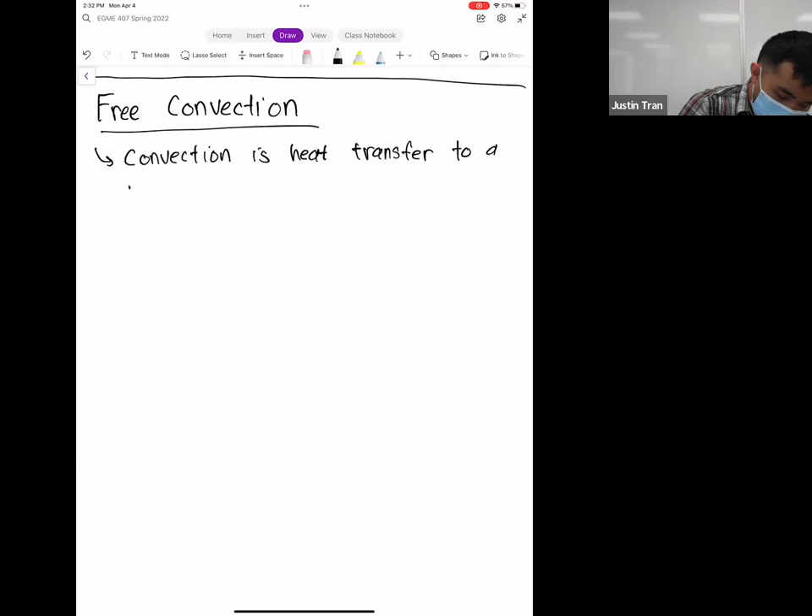The key word there being moving, right? The unique thing that fluids can do that solids can't is that they can flow. By flowing, they basically take any heated particles next to the surface and move them along with the flow. So we've seen that convection is always going to enhance your heat transfer relative to conduction.

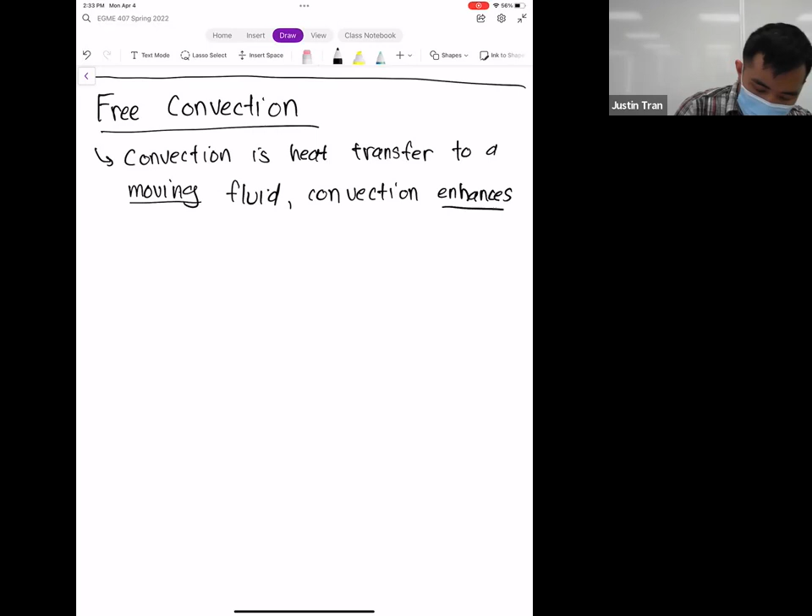Before the break, I gave you an interesting thought experiment. We've always thought of convection as occurring with a moving fluid, but I asked you: is it possible to have convection when the fluid does not have any forced velocity? Of course, the answer is yes. The way we can get moving fluid without forcing it, let's say without a pressure gradient or a fan or something like that, is through buoyancy.

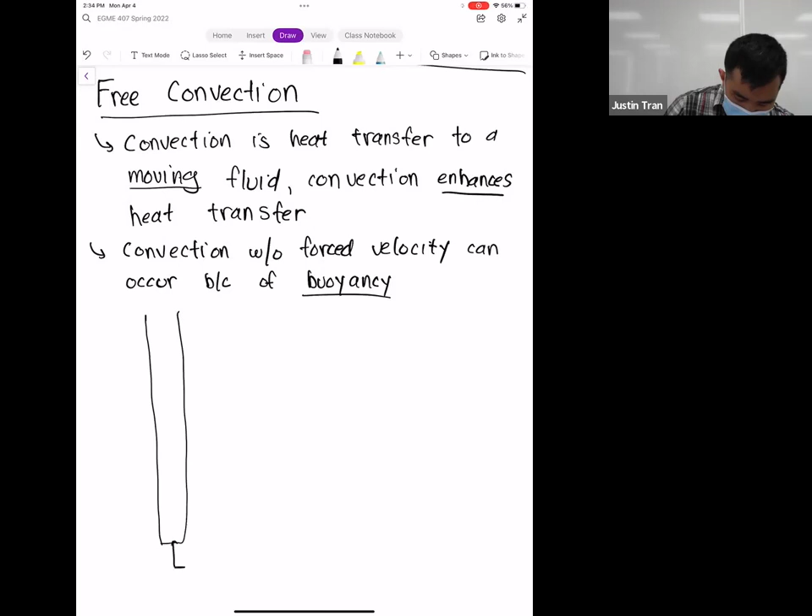Everyone thinks of buoyancy as the tendency for things to float in water. The situation we're looking at is one that looks like this: we have a plate at some temperature Ts, where Ts stands for the surface temperature. This plate is surrounded by a fluid at a temperature T infinity.

But we also know that this fluid is still, and a still fluid means the velocity in it is zero. But if the plate's temperature was higher than the fluid's temperature — let's say Ts is greater than T infinity — this means that the fluid next to the plate is going to be heated up.

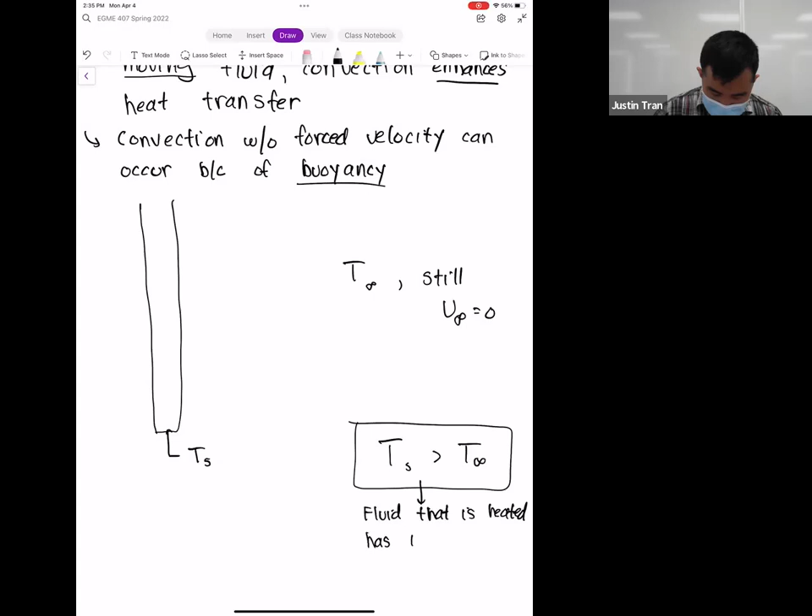And we know that whenever fluid is heated, its density goes down. So what you have here, if I draw a boundary layer like this, is that next to the plate you basically have fluid of a lower density, and outside there is fluid of a higher density.

Assuming we're on planet Earth or some celestial body with gravity, and gravity points downwards like that — whenever you have a fluid with a lower density sitting in a fluid with a higher density, that fluid is going to want to rise. It's going to go against the direction of gravity.

And thus, even without forcing it ourselves, just by having different degrees of density within our fluid, we're going to get some flow. Oftentimes it may not be a lot of flow, but that flow is enough to trigger convection. So you get situations like this where you have more heat transfer than you would if the fluid was just completely still.

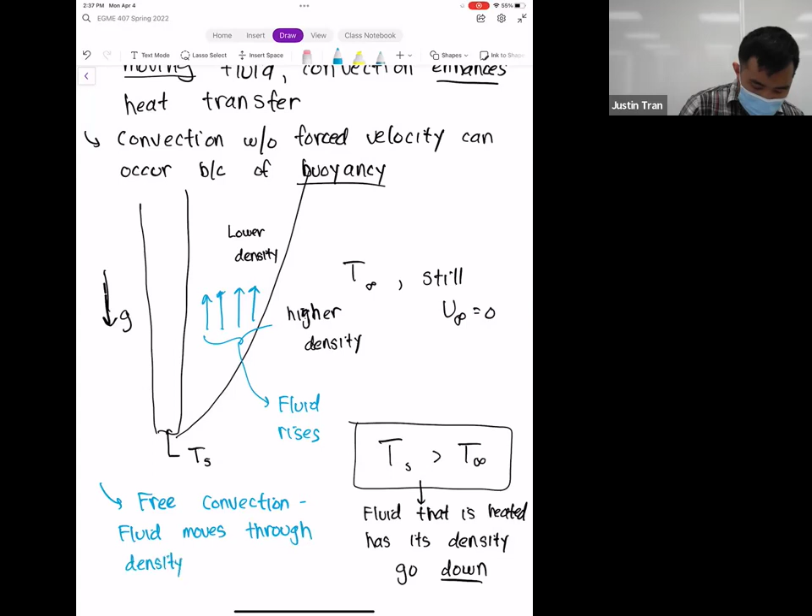Right, and we were in the middle of examining these kinds of situations.

All right, so what you'll see is that the process we're going to go through is still the same. We're still going to be identifying our geometry, computing Nusselt numbers, using those Nusselt numbers to compute H, and then from H we can use them in thermal circuits or what have you. It's just that because the nature of the flow here is fundamentally different than all the other convection situations we've seen, it's going to change how we interpret certain things, and it's going to change what non-dimensional numbers we're going to use as well.

Any questions on this?

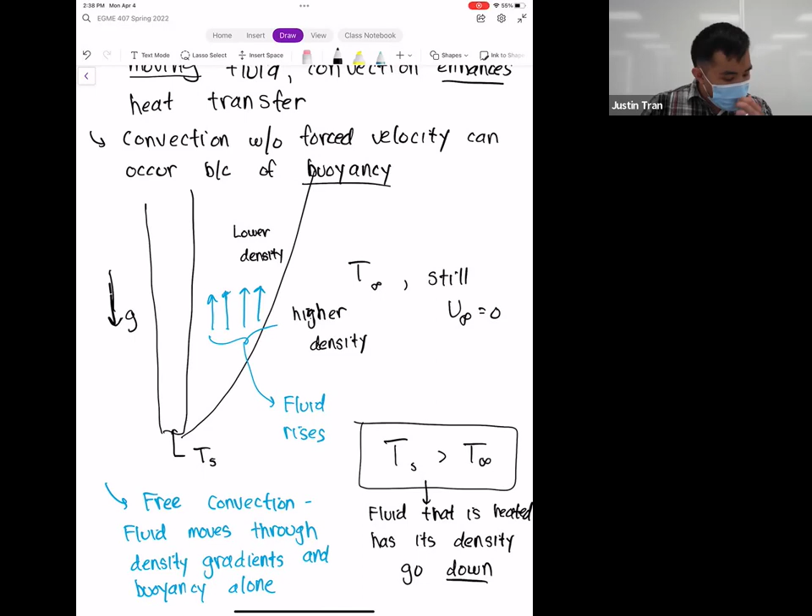Okay, so let's talk non-dimensional numbers, and in particular, let's talk about two new numbers that we haven't seen before, which is the Grashof number and the Rayleigh number.

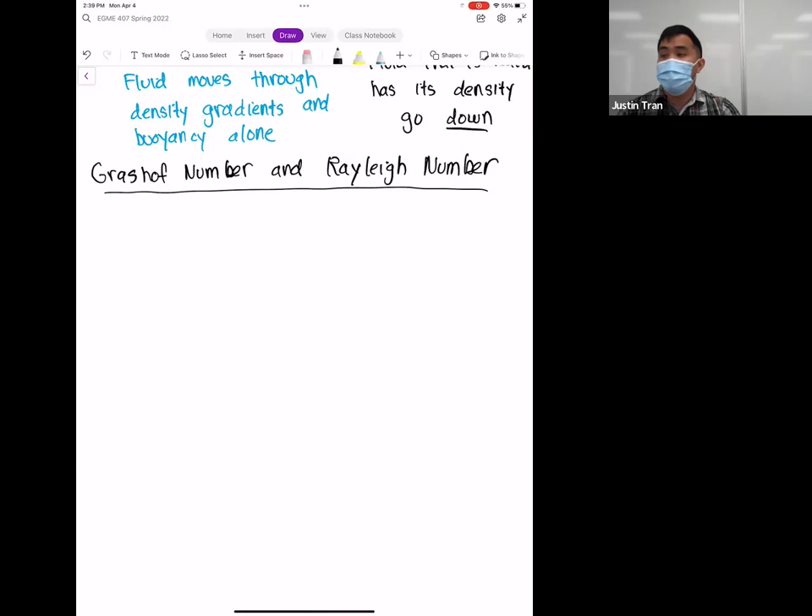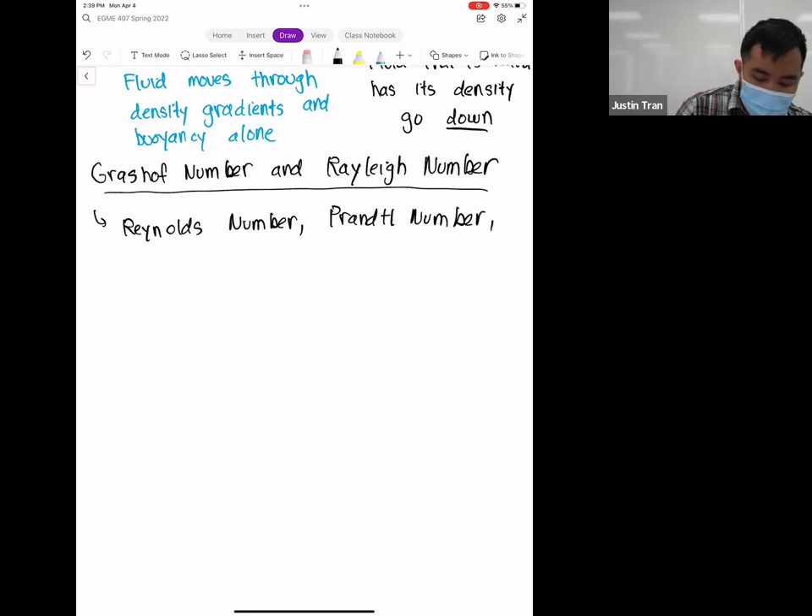All right, so what we've seen so far in convection is that these non-dimensional numbers are playing a huge role in how we compute our coefficients, right? So far we've seen things like the Reynolds number, we've seen the Prandtl number, and of course the Nusselt number. All of these non-dimensional numbers have been vital in our analysis of convection.

Right, because what we've been doing is taking physical situations, computing these non-dimensional numbers - the Reynolds number, the Prandtl number, and Nusselt number - and basically using experimental results or experimental correlations that people have discovered in the past to compute things like convection coefficients. But free convection is a little bit different, and in particular, I want to focus on the Reynolds number here.

The Reynolds number, we know, is defined as the ratio of inertial forces to viscous forces. And of course, its formula that we've been using is some velocity multiplied by some length, divided by viscosity.

In particular, I want to talk about the numerator, inertial forces. According to this relationship, inertial forces equal the product of a velocity multiplied by the length. In particular, this velocity here is the velocity of the forced flow - the velocity that we're forcing the flow to move at. This is the velocity we use, say, if we have a fan that's driving our flow, or if we're external, out in the atmosphere, that's the velocity of the wind currents. In other words, this is a characteristic of how much we're forcing the fluid to flow.

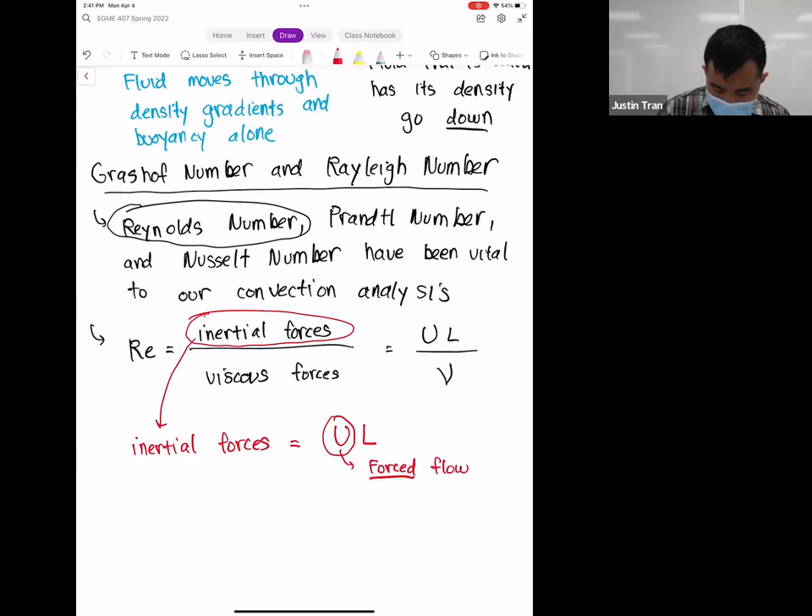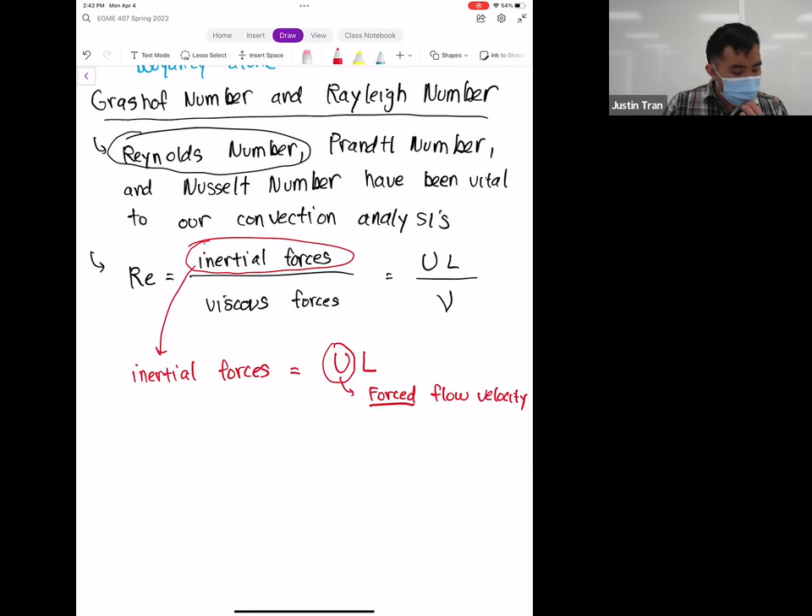For free convection, of course, we don't have forced velocity anymore. We don't have forced flow. And so it doesn't make sense to use the Reynolds number at all, because we're not forcing any flow. Instead of the Reynolds number for free convection, we need a different number.

In particular, for free convection, just what we mentioned above, the most relevant mechanic now is not forced flow or inertial forces, but instead we have buoyant forces. And so it'd be great if we had a non-dimensional number where instead of inertial forces, we have buoyant forces, and on the bottom we still have viscous forces.

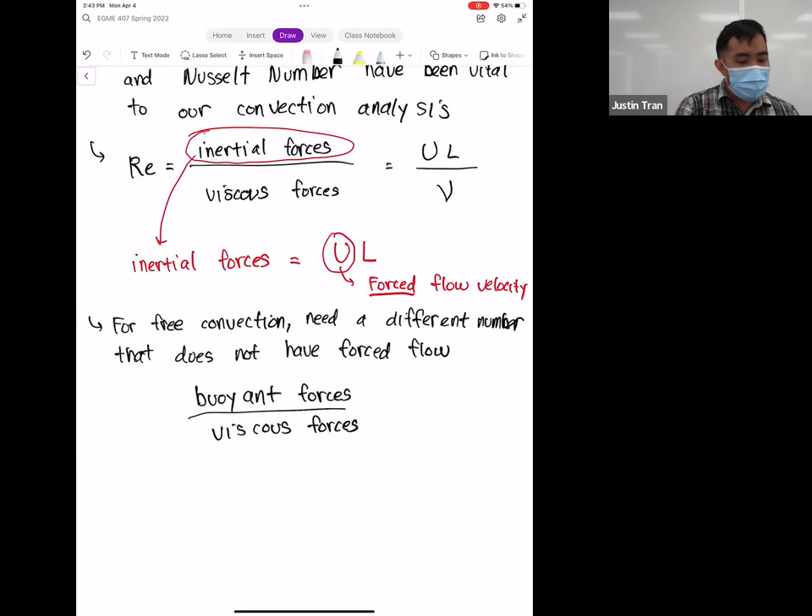And so this is the ratio that we should be looking at instead of the Reynolds number. Luckily, this number does have a name - someone has already discovered this, a dude named Grashof. Of course it's named after him, so the Gr here stands for Grashof number, and its expression is given by the following.

And so for buoyant forces, we can kind of reason this through a little bit. Whenever you talk about buoyant forces, gravity is always going to play a role, because the main driving force in buoyancy is essentially differences in weight. And when you're talking about weight, you're always talking about gravity to some extent, right? So gravity has to be there.

The other thing that drives buoyant forces is the temperature difference. The reason why we're having density gradients, or differences in density in our fluid, is the fact that we have a difference in temperature between our surface and our fluid. So that has to be there.

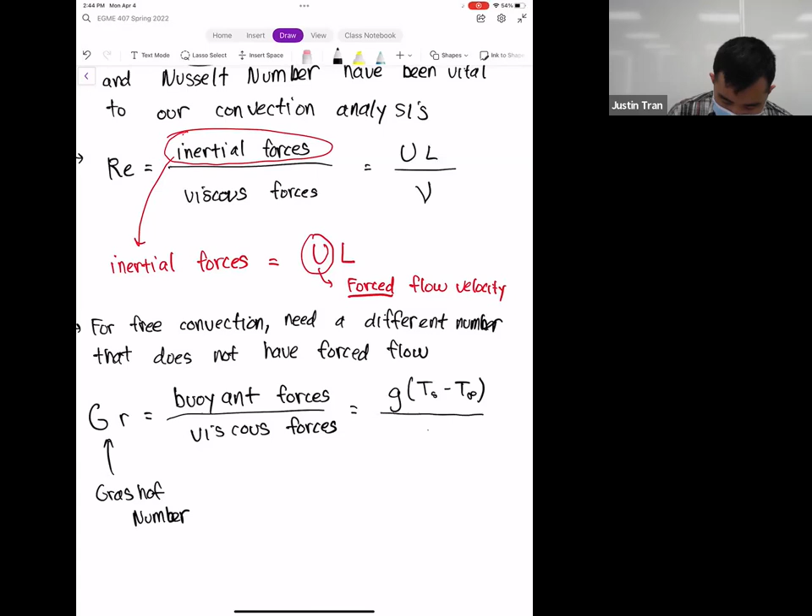And then in the denominator, we have to have the kinematic viscosity, right? There's nothing that represents viscous forces better than viscosity itself, so we have to have viscosity there as well.

And so this is kind of like our blueprint. This is the blueprint for our Grashof number, where in the numerator we have a lot of quantities that represent buoyancy, and then in the denominator, we have our representation of viscosity. So in essence, this is kind of the start of our Grashof number - it's not complete yet, we still have to non-dimensionalize this. But I want to walk you guys through the logic of how these non-dimensional numbers come to be.

All right, any questions on this?

Okay. All right. So here's the beginnings of our Grashof number. We have our gravity and temperature difference up top, and we have a viscosity on the bottom. But we can't use this yet, because the thing about non-dimensional numbers is they have to be non-dimensional, and this right here still has dimensions.

If you write out the dimensions for all these things, gravity is meters per second squared. Temperature, of course, here is in Kelvin or degrees C. And kinematic viscosity here is meters squared per second. And so nothing is canceling out, so we have to add some more terms to this or do some more work to make it non-dimensional.

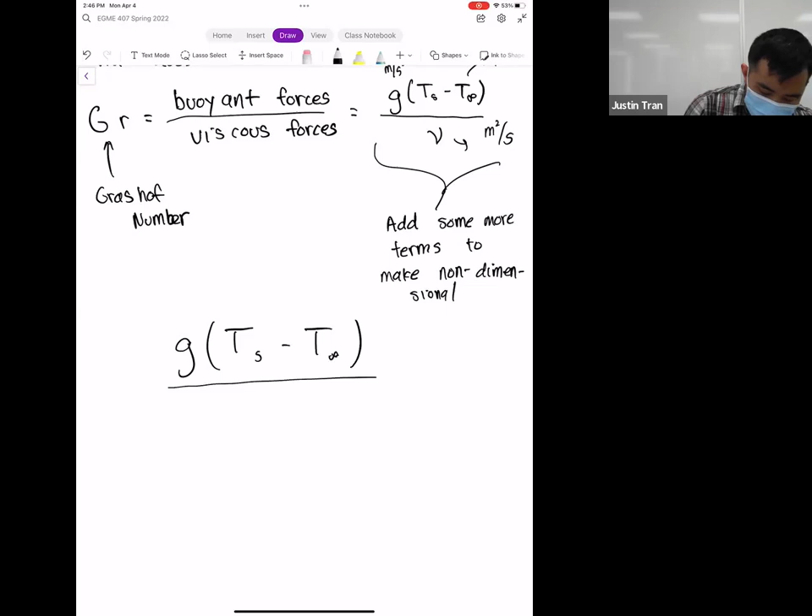Okay, so let me go ahead and write it down here a little bit bigger. We have gravity times the temperature difference divided by viscosity. The first thing we're going to need is something to cancel out the temperature, because there's no way that viscosity is going to have anything to do with temperature. Viscosity is not a temperature dependent process.

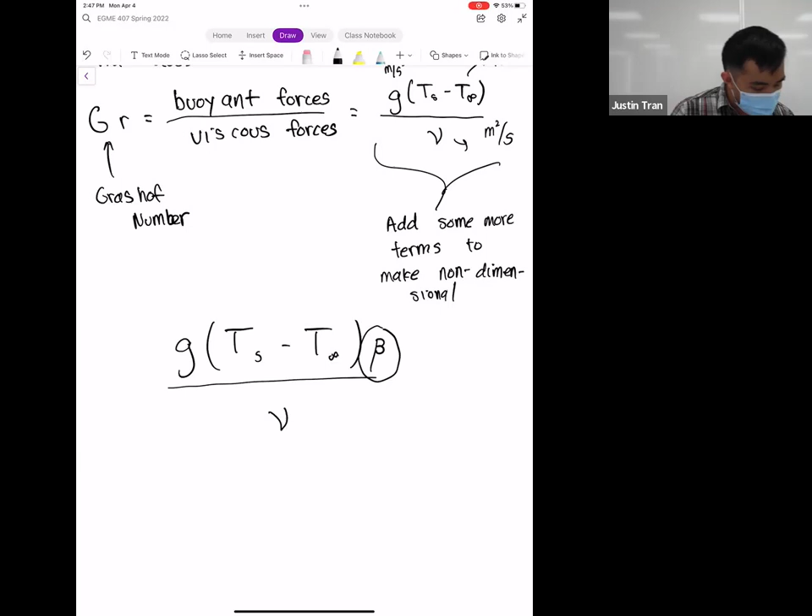So what I'm going to do is add this parameter here. We'll call it beta. This beta is known as the thermal expansion coefficient. The units for beta here are going to be 1 divided by Kelvin, or 1 over temperature. And so that's going to cancel out the temperature units up top.

We're not going to spend too much time talking about what beta is, because that gets more into fluid mechanics and continuum mechanics. But the way you can interpret it is that it's a way to express how quickly the density of a fluid changes with temperature. Different fluids will react differently. Some fluids will have their density change very rapidly with temperature, and some will change very slowly. This beta is a parameter that reflects that. It's not that hard to compute, and we'll do an example a bit later. That takes care of the temperature units.

The next thing we have to do is cancel out the gravity and the viscosity. Up top, what we have is meters per second squared, and on the bottom we have meters squared per second. So we have to multiply this by a few things to cancel these two out. Up top we have 1 over second squared, so to cancel that, the viscosity down here has to be raised to the second power. If we raise this to the second power, we get meters to the 4th divided by second squared, and so the seconds will cancel out.

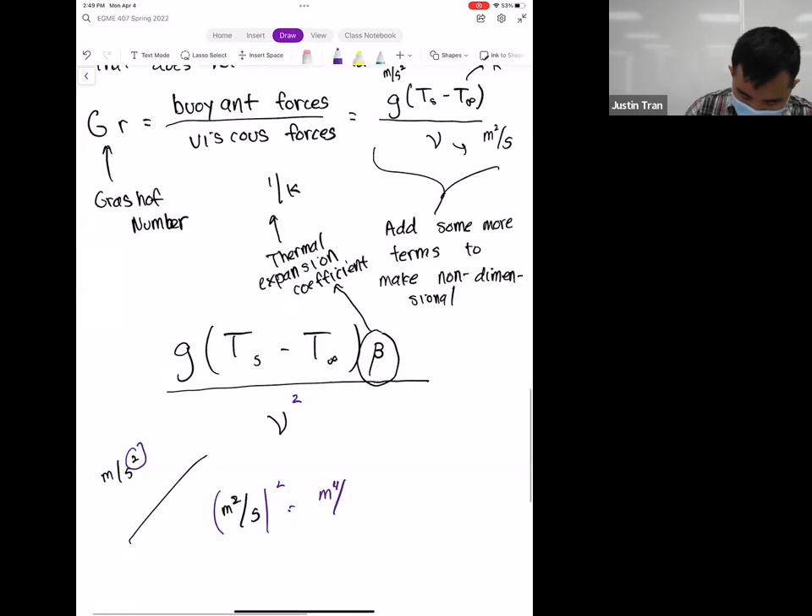But now we have too many meters. We have a meter up top and a meter to the 4th on the bottom. To cancel that, we're going to take a length scale. That length scale could be any kind of length scale in your problem, and we're going to multiply that up top. So we have m cubed up here, and this m cubed is going to cancel out with the m to the 4th. We end up with m1, and that m1 is going to cancel out with that. And so that's our full expression for the Grashof number.

So our Grashof number here is going to be g times beta times (T_s minus T_infinity) multiplied by L cubed, divided by viscosity squared. This is our expression for the Grashof number. It's a bit more complicated than the Reynolds number, just because the units for this were a little bit difficult to work with, since we have to work with temperature. But that's the logic of how this Grashof number came to be.

And remember, what the Grashof number represents is the ratio of buoyant forces to viscous forces. What this Grashof number is going to do is play the same role as the Reynolds number in our previous Nusselt number correlations.

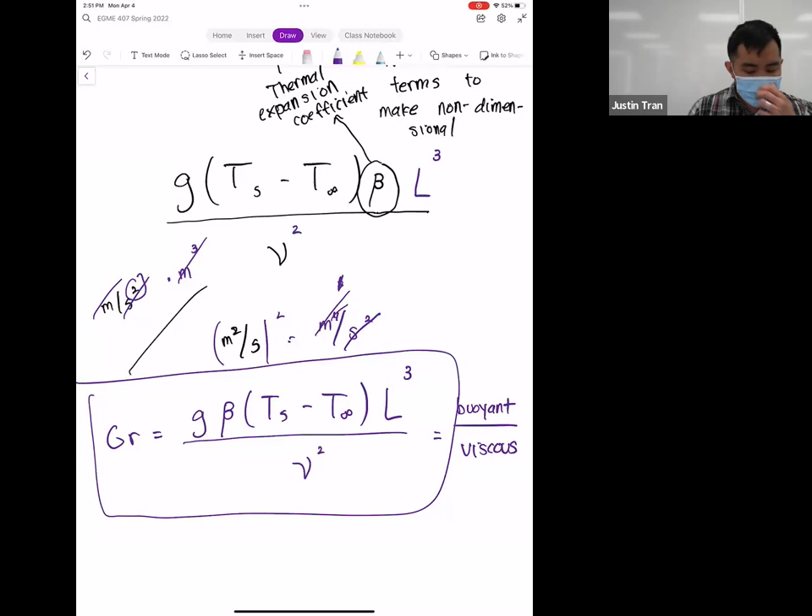So basically, we're going to follow the same process that we've always done for convection coefficients, but instead of the Reynolds number, we're computing this one instead. All right, any questions on any of this?

Okay, so now we have a new non-dimensional number that joined our family, right? So we have the Grashof number, and we'll talk about the Rayleigh number in a little bit. But before I talk about the Rayleigh number, let's go ahead and do a little bit of a comparison

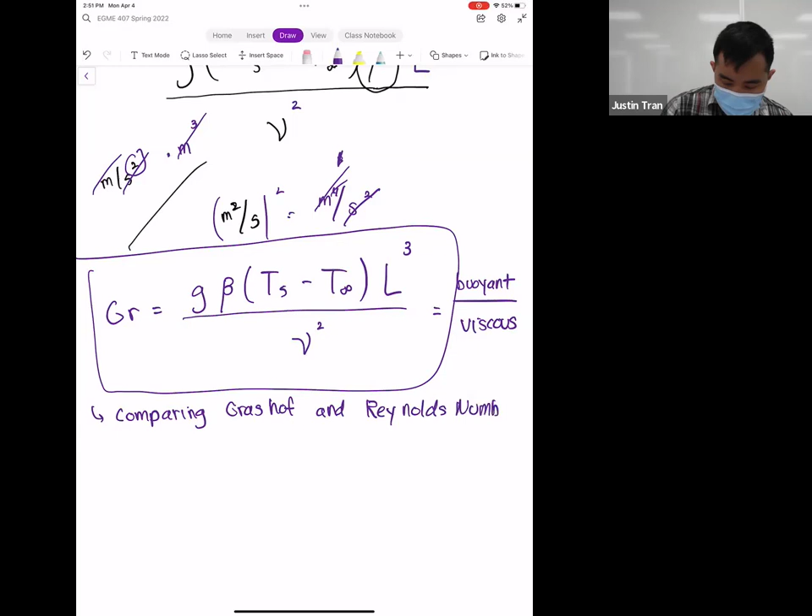of the Grashof number and the Reynolds number. And in particular, I want to use these numbers in a situation when we have both free convection and forced convection.

Or in other words, I want to answer the question of, how come we've ignored free convection up to this point? Because this is a heat transfer class, and no matter what, we're always going to be working with temperature differences between the surface and the fluid. So in theory, free convection should always be there because we're always working with temperature differences. But up to this point, we've kind of just pretended it doesn't exist, right?

So why have we done that? If you remember, before we went on break, I think I made a comment about how most of the time, when you have both free and forced convection, most of the time the forced convection is going to dominate.

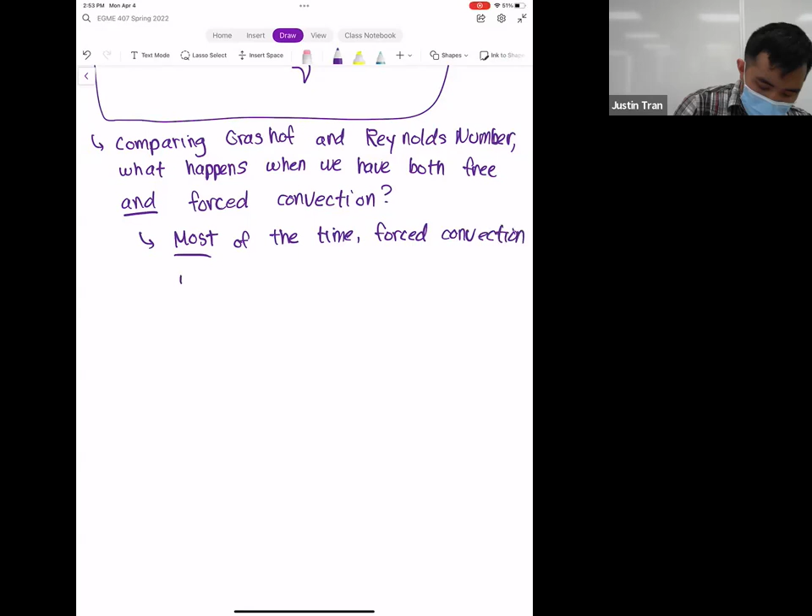And the reason for that is that the magnitude of the velocities that you get from these buoyancy differences is usually pretty small compared to, if you stick a big fan next to your surface, right? But there are some situations when free convection is actually going to be greater than forced convection.

Because most is not all of the time, right? And so how do we determine which one is going to dominate, or if we need to consider both at the same time?

So we can assess, and in other words, we can measure, the relative strength of the free and forced convection by using their two corresponding non-dimensional numbers.

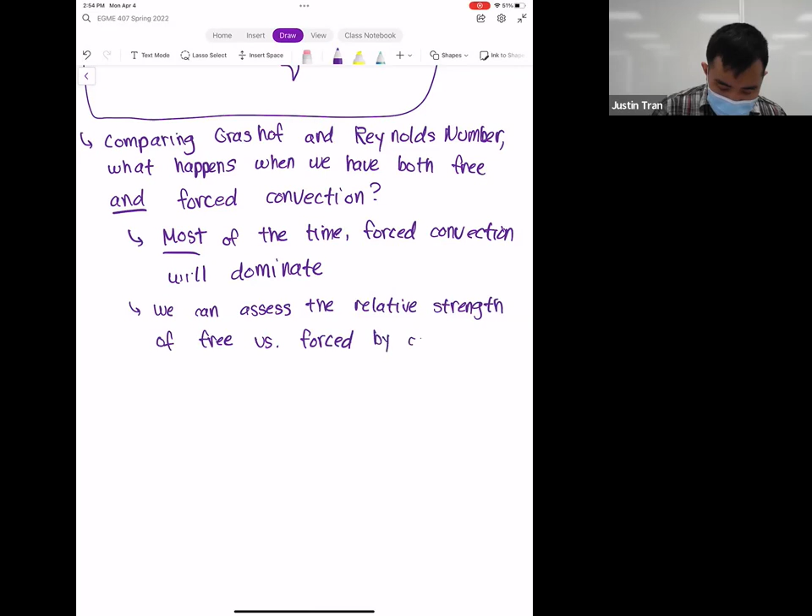And their non-dimensional numbers, remember, are the Reynolds number for forced flow and the Grashof number for free flow. And so if we take the ratio of the Grashof number over the Reynolds number,

and just to make sure that the two viscosities have the same power, we take Reynolds number squared, because remember the Grashof number has viscosity squared on the bottom. And so depending on the value of this ratio, we can determine which one is going to dominate or if they're the same.

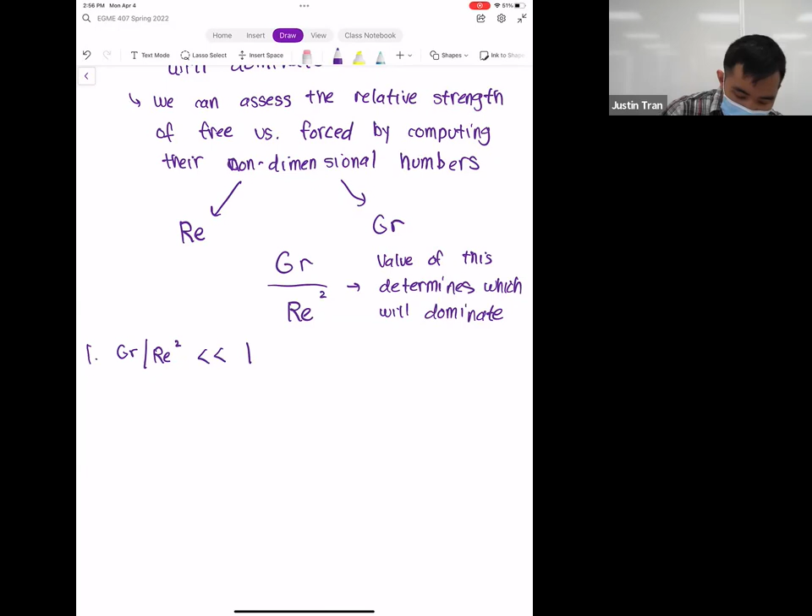So I have three situations here. If the Grashof number divided by the Reynolds number squared is much less than 1, that means the Reynolds number is really, really high compared to the Grashof number. And in these situations, the forced convection is going to dominate.

And if the forced convection dominates, that means we can ignore the free convection. You can basically treat it the same as a problem that we've been doing for the last few weeks.

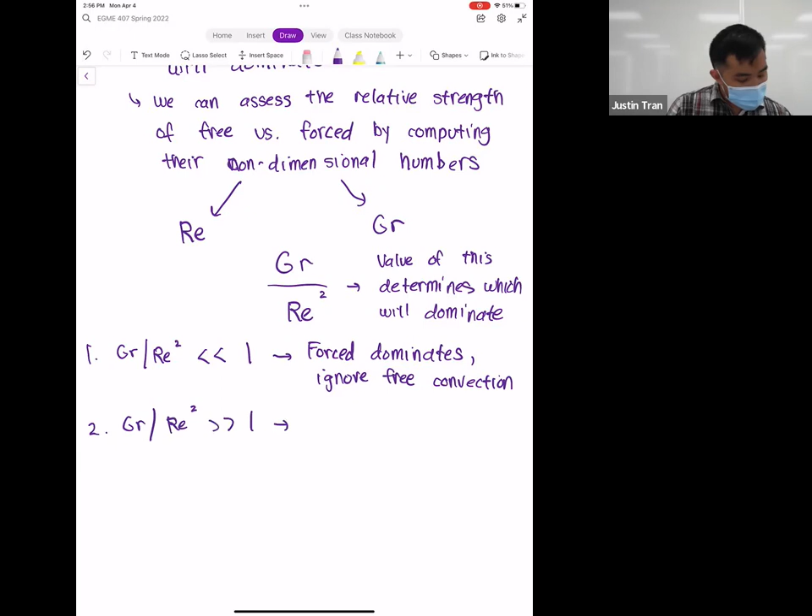And then you have the opposite situation. So let's say that the Grashof number over the Reynolds number squared is greater than 1, much greater than 1. In this case, the free convection will dominate. Here we can ignore the forced convection.

So those are the two extreme situations. And of course, we have the situation where the Grashof number and the Reynolds number are roughly equal magnitude. And so if the ratio here is 1, that means you have true mixed convection.

And so here you have to take both into account. You can't ignore one or the other, but these situations are very, very complicated. It's a lot more complicated than just solving the free side and the forced side separately and just adding them together, because the two phenomena are actually going to affect each other.

And so the density differences are going to affect the flow, and the flow is going to affect the density differences. So you can't really solve them separately and then bring them together. You have to solve them both at the same time. Most of the time, you're going to need some kind of computer software, some kind of simulations to do this, because it's a little bit too complicated to do by hand. So we won't cover any of these situations in this class, but just know that these are very, very complicated.

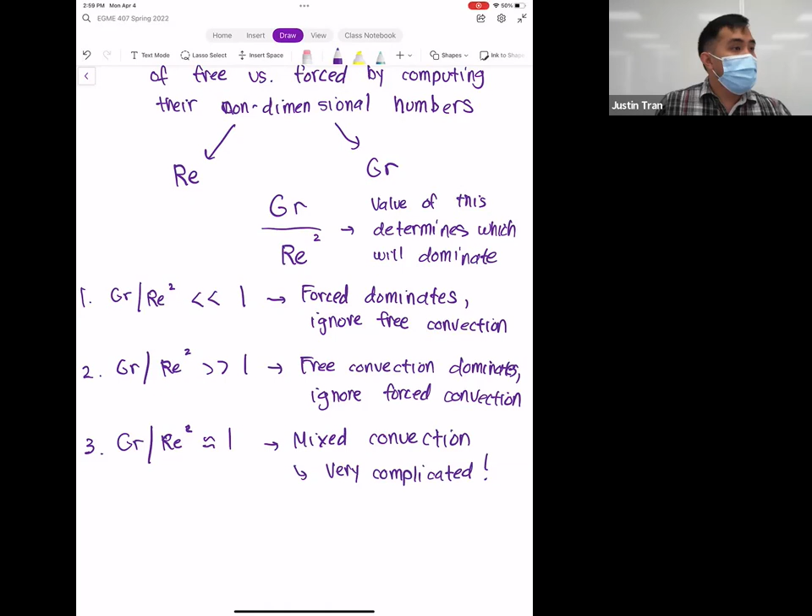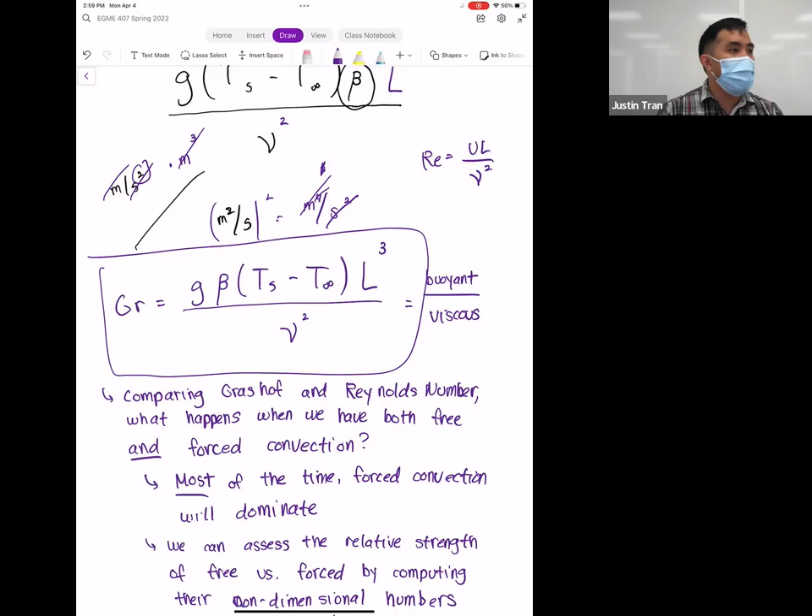So the Reynolds number is squared because if you look at our definition for the Grashof number, we have viscosity squared, and we had to square the viscosity to cancel out these units. But the Reynolds number is just U times L over the viscosity. So even though both are non-dimensional already, we want to make sure we're comparing apples to apples. We want to make sure that one has viscosity squared, and the other one has viscosity squared too.

Okay, so let's talk about the Rayleigh number. It's actually a little bit of a convenience for us computing these calculations. If you remember from homework 4, whenever you compute the Nusselt number, it's always a product of the Reynolds number and the Prandtl number. In other words, the Reynolds number and the Prandtl number, they always appear kind of in pairs.

So in other words, we had our Nusselt number, and all of our correlations took this kind of form. We have A, where A is some decimal, and the Reynolds number raised to some m power, and the Prandtl number raised to some n power. So all our correlations basically take the same form: Reynolds number to some power multiplied by Prandtl number to another power. We couldn't really combine them because their powers were different, so m and n are different.

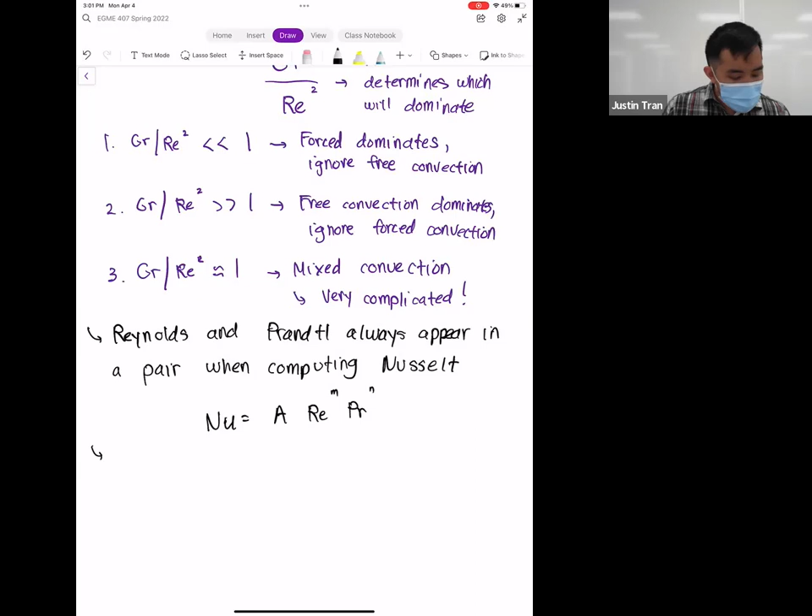What's unique is that, just based on how the Grashof number is defined, whenever we compute Nusselt numbers for free convection, both the Grashof number and the Prandtl number appear with the same power.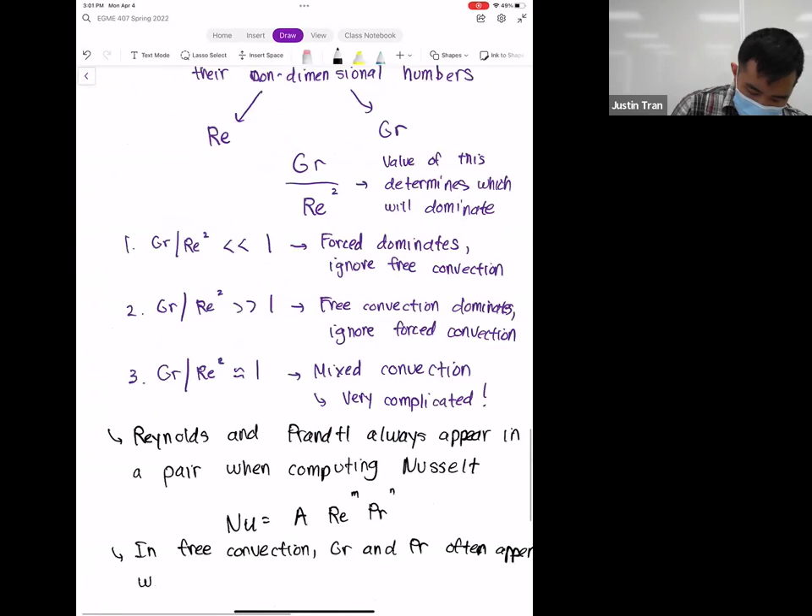My stylus is still on spring break. So is my spelling.

There we go. Okay, so for free convection, we usually have something like this: the Nusselt number is equal to some coefficient multiplied by the Grashof number times the Prandtl number, but these are raised to the same power. They usually appear like that, just based on how the Grashof number is defined.

And because these two always appear together, okay—this is probably the easiest PhD dissertation in the world—there's a guy named Rayleigh. What he knows is that these two always appear together, so let's just combine them. The Rayleigh number, which we'll call Ra, is equal to the Grashof number multiplied by the Prandtl number.

Yeah, so they both have the same n. So what you're going to see is that all of our Nusselt correlations will take this form: Nu equals A multiplied by the Rayleigh number raised to some n power. So all of our correlations are going to look like this.

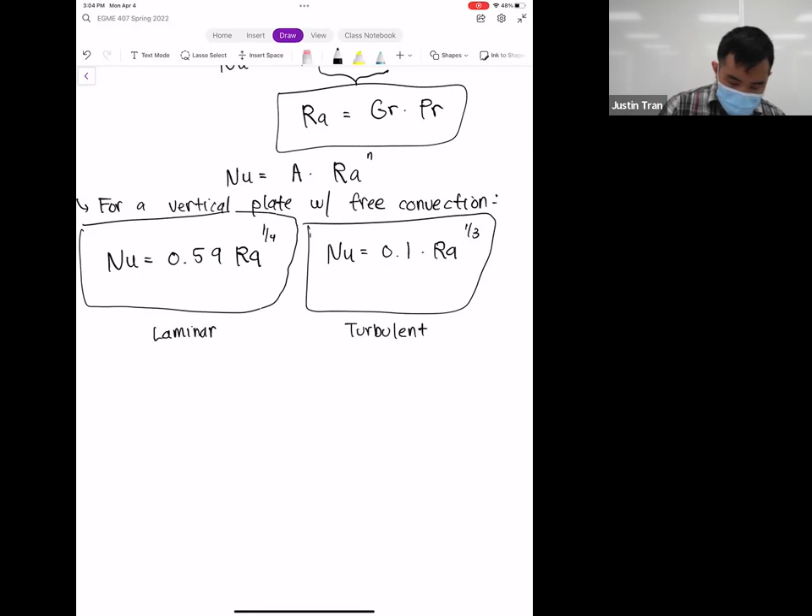And you're probably asking, how do we know if the flow is laminar or turbulent? Well, just like in forced convection, we use our non-dimensional number for it, which here is the Rayleigh number. For free convection, that threshold is 10 to the 9th. We'll call this the critical Rayleigh number, Ra_c. So when the Rayleigh number exceeds 10 to the 9th, that means we're going to have turbulent flow.

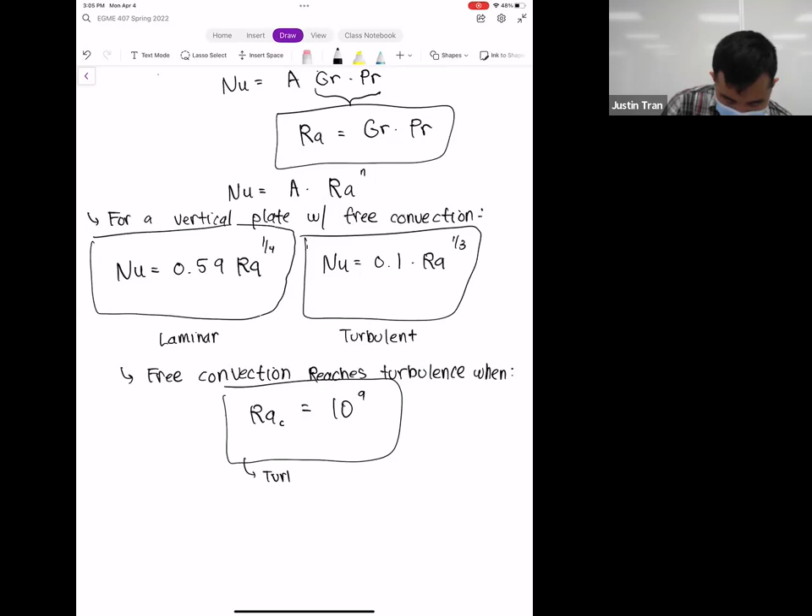Okay, so now that we know what free convection is, and we know how to compute its Nusselt number, we're ready to start doing some examples. That's all we really need to do a convection problem: we need to know what the geometry looks like, what the physics are, and how we compute the Nusselt number. Now that we have all that, we're ready to start doing some problems.

Professor, if I can ask—yep, what's up? So whenever we're dealing with some of our free convection problems, we only consider it outside of a pipe, right?

We don't consider it different if it's flowing through a pipe, only when it's hitting a plate or any other exterior surface. We're only looking at the flow itself. I do have an example with external flow added, but for now we're just going to consider free convection, where the fluid is normally stagnant, and density differences incite some flow.

Okay, thank you. Any other questions before we jump into an example? All right, so let's go and do a simple example.

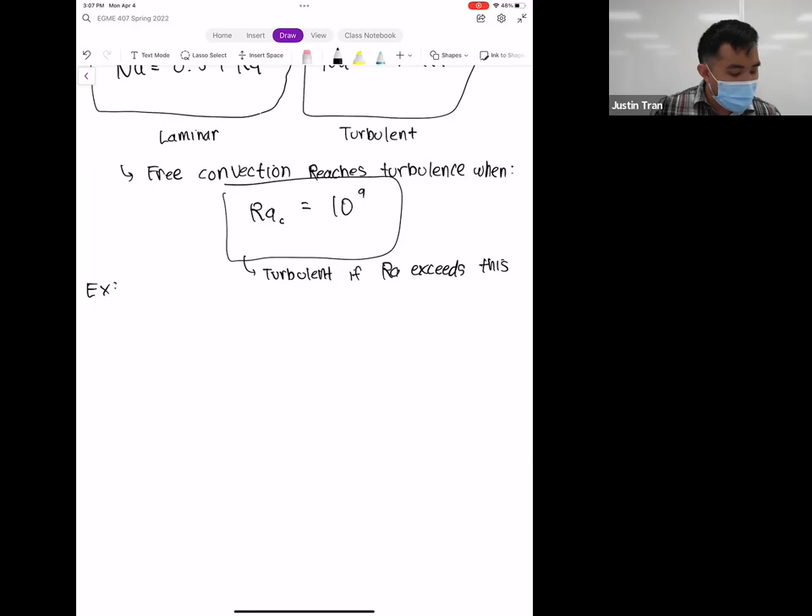Let's consider a vertical plate, and let's say the plate is hotter than the surrounding fluid. Here's our vertical plate, and the surface temperature here is 70 degrees Celsius.

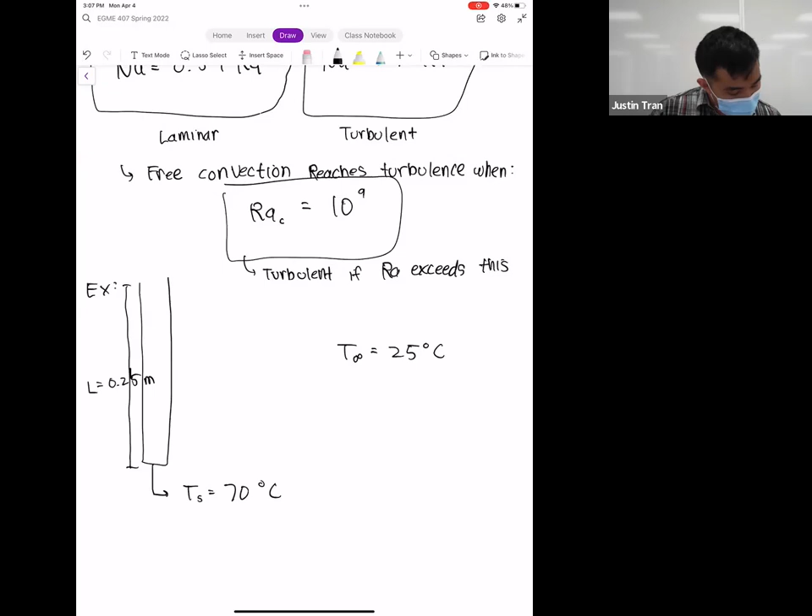And the length of the plate, we'll say, is a quarter of a meter, so 0.25 meters. Surrounding this plate is a fluid which is at room temperature, and the fluid here is air.

The air here is stagnant, so there's no forced flow, and we're not dealing with any inertial forces at all. But because our plate is so much hotter than our fluid, those density differences are going to cause some convection to happen. In this problem, we simply want to compute the convection coefficient associated with this situation.

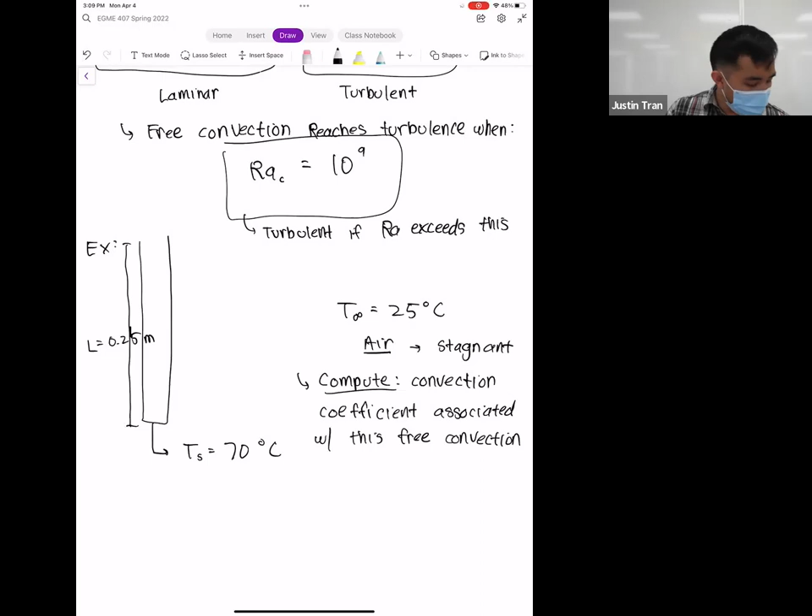So we have the same geometry that we've been looking at, it's just now we're going to put some numbers to it and run through the process. Any questions on the problem setup here?

All right, let's go ahead and apply our convection problem-solving recipe. Step one, the most often skipped step, is to identify the situation. This step becomes a little more complicated because before we just had to identify the geometry, but now we have to identify what kind of convection we're going to have. We need to state whether we're doing forced convection, free convection, and what the geometry is, because that's going to affect everything we do from here on out.

For this problem, what we have is free convection on a vertical plate. It's free convection because we don't have any forced flow, since we have air that's stagnant. And the geometry here is a vertical plate because the long side of the plate is pointing up and down.

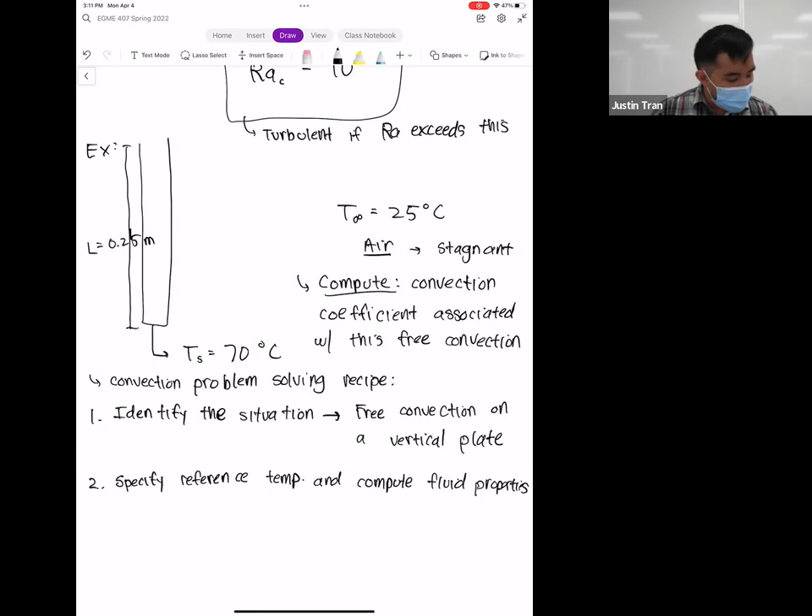So the next step is we need to specify our reference temperature and compute our fluid properties. Remember, our film temperature is just the average between our fluid temperature and our surface temperature. So we have 70 degrees C plus 25 degrees C, divided by 2, which is equal to 47.5 degrees C.

If we plug this into a calculator, or use the textbook tables, that's fine as well. Remember, our fluid here is air. For these properties, we have a viscosity of 17.95 times 10 to the minus 6 meters squared per second, a Prandtl number of 0.7, and a thermal conductivity of 27.78 times 10 to the minus 3 watts per meter Kelvin.

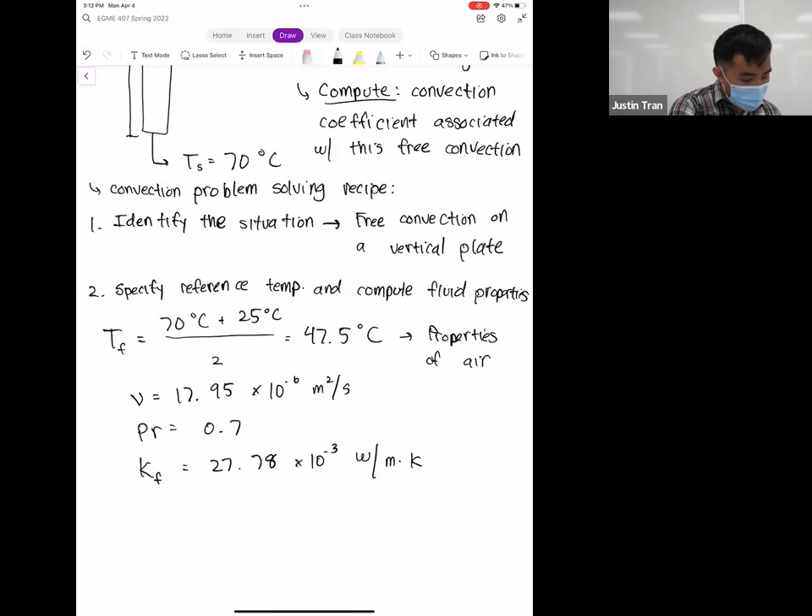And that's it, that's everything we can look up in the table. But if you remember from our Grashof number and Rayleigh number, we also need this beta, which is our coefficient of thermal expansion.

You can try as you might, go to a lot of online calculators, and a lot of them won't have this value—well, some might, some of the really detailed ones will. But it's normally a little difficult to find unless you know where to look. So for our problems, we're going to approximate beta by taking the inverse of the film temperature.

But this step here is really important, because up to this point in the class I've said it doesn't really matter if you use degrees Celsius or Kelvin, since most of the time we're dealing with temperature differences. Here it matters, and so when you take this inverse, you have to make sure the temperature is in Kelvin.

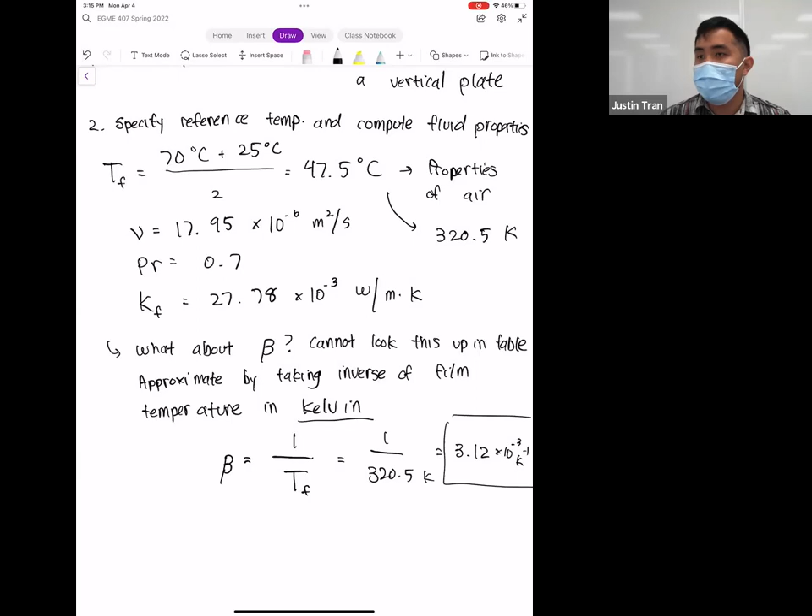Any questions? Yeah. The 320.5 came from this. We first computed our film temperature, then we converted to Kelvin.

Okay, so now that we have all the properties, we have everything we need to compute our numbers. Let's go ahead and do that. Step 3 is usually when we compute our Reynolds number.

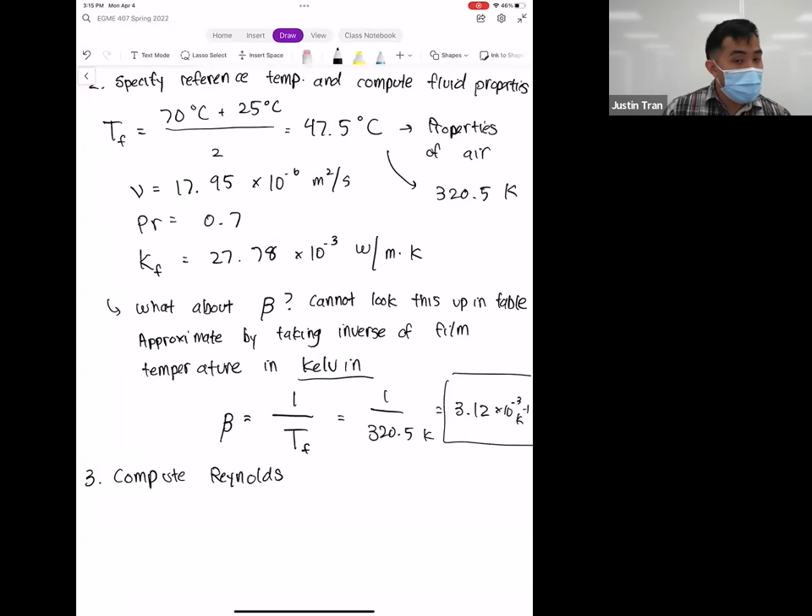But of course here, we don't have any forced convection, so we're not going to compute the Reynolds number. Instead, we're going to compute the Rayleigh number, which is simply the product of the Grashof number and the Prandtl number.

The formula for that is g times beta times TS minus T infinity multiplied by L cubed divided by the viscosity squared. And since it's a Rayleigh number, we multiply by the Prandtl number.

So we have everything we need here. Gravity, remember, is just 9.8 meters per second squared. Beta we just computed. The difference in surface temperature and T infinity are given in the problem. For this temperature difference, it doesn't matter if you do Kelvin or degrees Celsius, because you're taking a difference, so this one doesn't matter.

L is just the length of the plate, and nu is the viscosity, which we just looked up. The Prandtl number we looked up as well. So we plug all that in and we get 6.67 times 10 to the 7th. So here is our Rayleigh number.

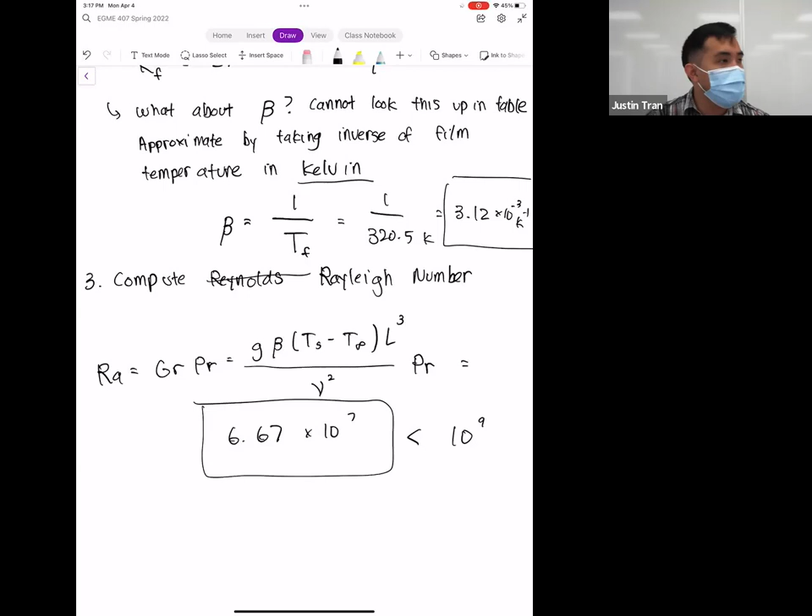So it's a very big number, something times 10 to the 7th is very big, but it's not big enough to be turbulent. Since this Rayleigh number is less than 10 to the 9th, this tells us that we have laminar flow.

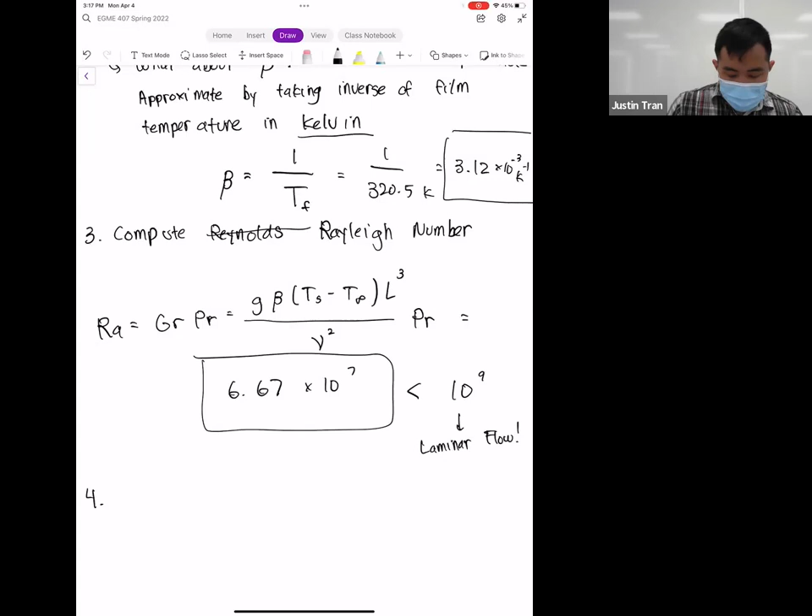All right, so that's step 3, the modified step 3 for free convection. Now that we know the Rayleigh number, we can go ahead and compute the Nusselt number.

For laminar free convection, we know that the Nusselt number is equal to 0.59 times the Rayleigh number raised to the 1/4 power.

So we plug all that in. We plug in our 6.67 times 10 to the 7th, raise it to the 1/4 power, multiply by 0.59, and we get a Nusselt number of 53.32.

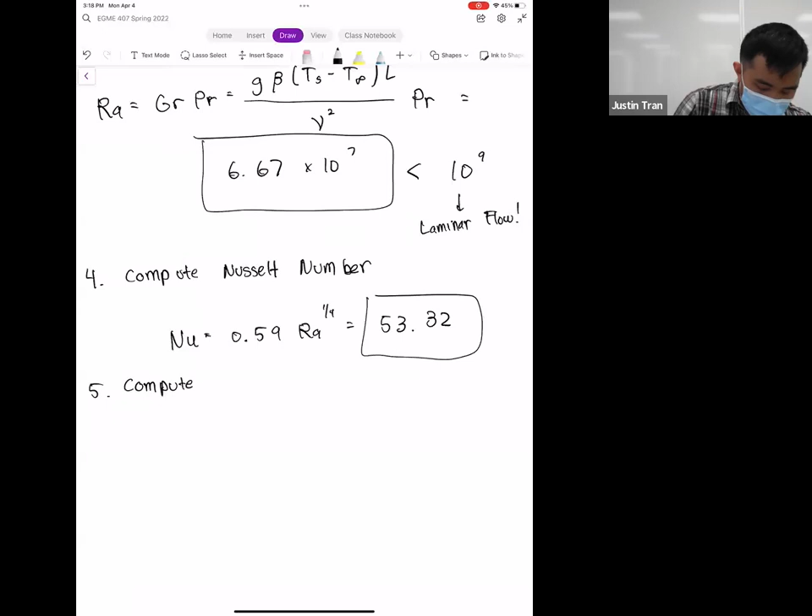And now that we have the Nusselt number, we can compute the convection coefficient, because our Nusselt number is equal to the convection coefficient multiplied by the length divided by the thermal conductivity. So our H, the convection coefficient, is equal to 53.32, which is our Nusselt number, multiplied by Kf divided by L.

So we plug in the numbers for that, and what we get is 5.925 watts per meter squared Kelvin.

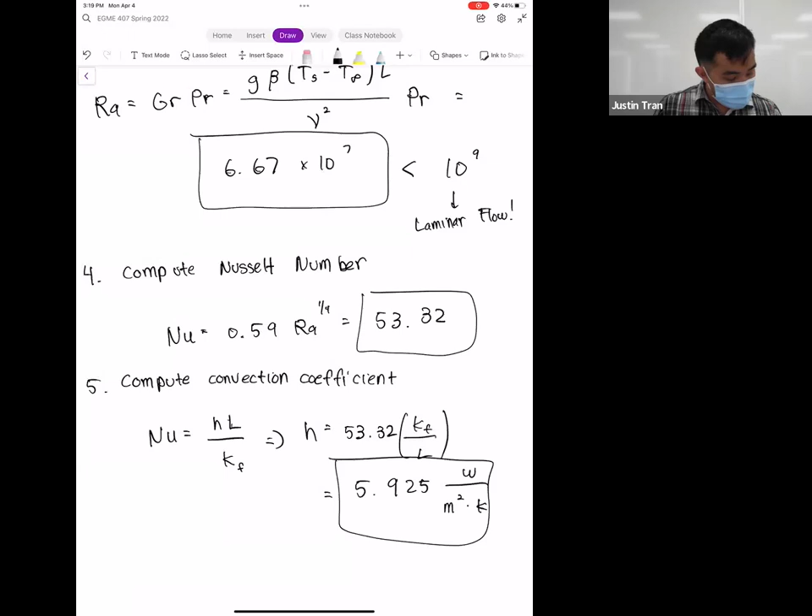And so that's the end of the problem. Any questions on this example here? It's the same process that we've been going over, the same convection process. It's just that we've made some tweaks here for free convection.

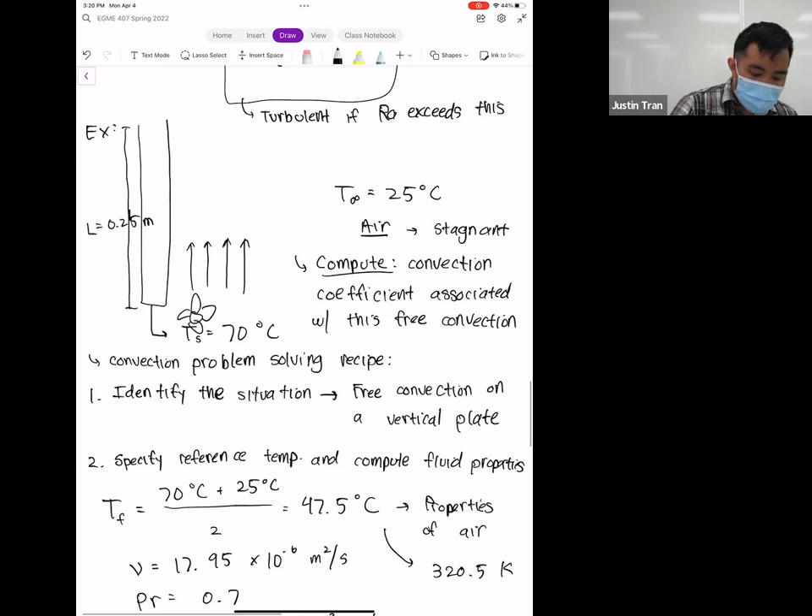Before we move on, I want to give you a little thought experiment. Let's say we have the same situation as before, but what happens if we add a fan underneath, blowing air? Let's say the air is moving with a velocity of 5 meters per second. I'll write it down here as well.

So this fan is going to force air to flow at 5 meters per second past the plate. We want to determine, in this situation where we've already performed the free convection calculations, if we add this fan, is this situation still going to be dominated by free convection, or is it going to be dominated by forced convection instead?

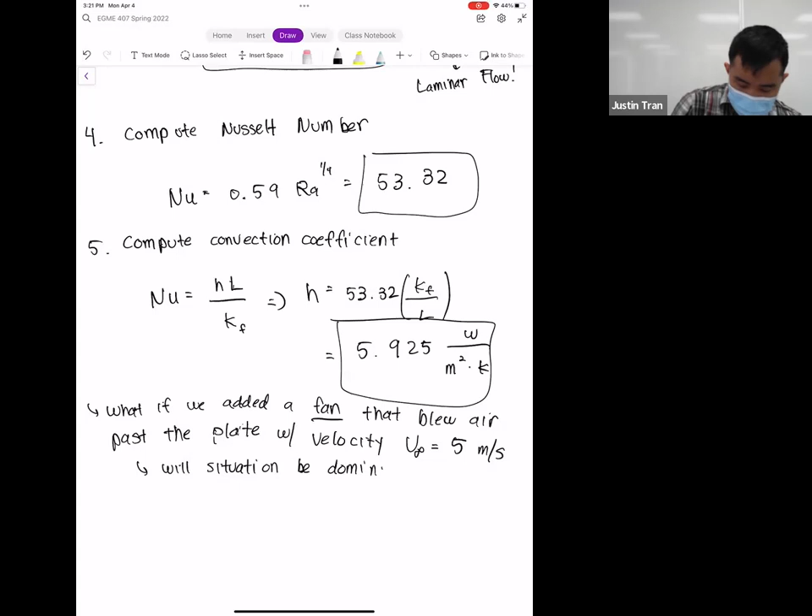If you remember, the way that we do this is we basically compare the relative magnitudes of the Reynolds number and the Grashof number.

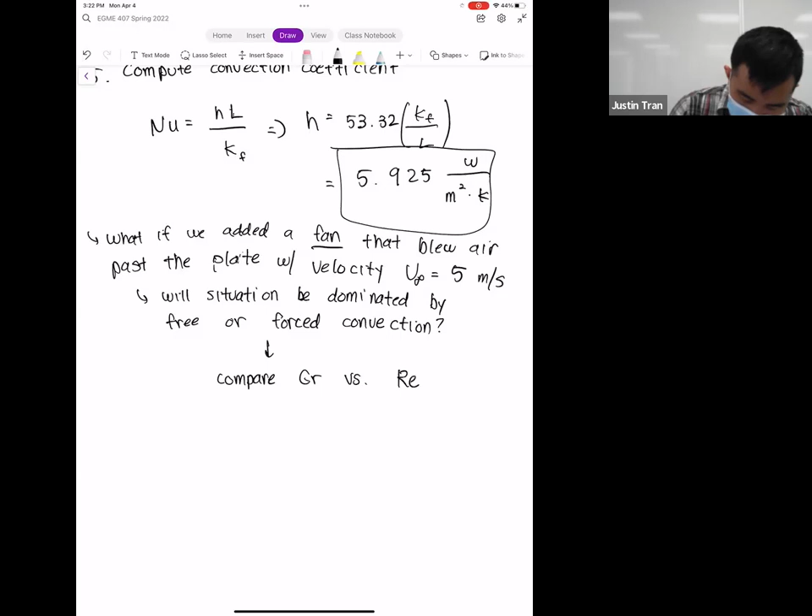To do that, we have to compute the Reynolds number. The Reynolds number is U infinity times L divided by the viscosity. We plug all that in, and we get 6.97 times 10 to the 4th.

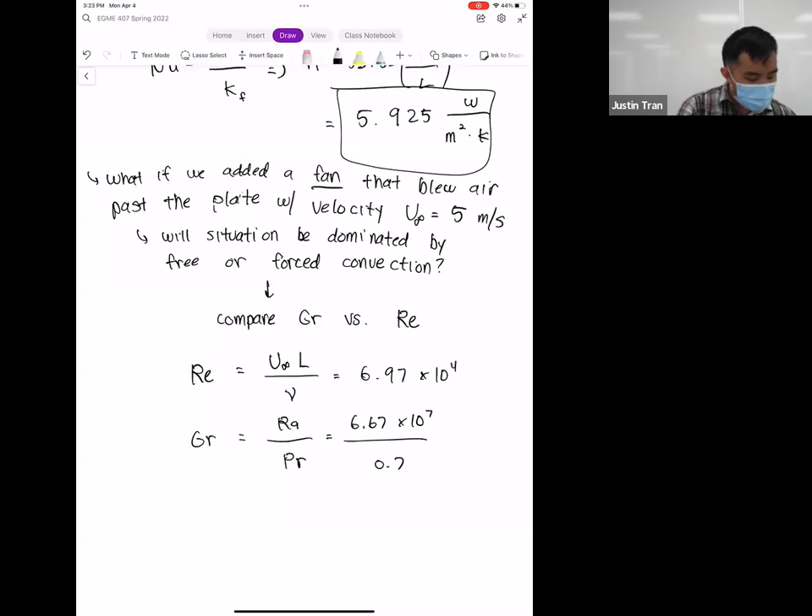Our Grashof number, we didn't compute directly in this problem, we kind of just jumped directly to the Rayleigh number. So the Grashof number here is going to be our Rayleigh number divided by the Prandtl number. That's 6.67 times 10 to the 7th, divided by our Prandtl number here, which was 0.7. I don't have this computed, but you can punch it into the calculator to see how much that is.

We can take these two numbers and compute their ratio, taking the Grashof number divided by the Reynolds number squared. As we basically plug in the numbers for this, what we get is 0.014.

Which is not insignificant. I wouldn't say that's a super low ratio, but it is only about 1.4% of 1, which is where we need to be for a mixed case. So what we can say is that because this is much less than 1, the Reynolds number here is a lot more significant than the Grashof number.

In these situations, forced convection will dominate. So if we were to redo this problem with this fan, we would basically just ignore the free convection, because this says that the free convection would only be about 1.4% of the heat transfer that you would get from forced convection.

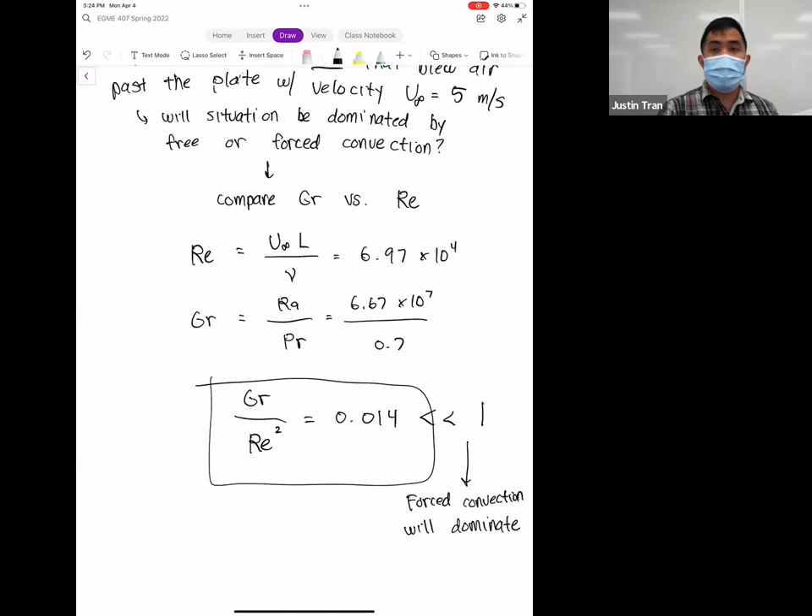Any questions on that?

Before we do another example, I want to make one more observation about the Rayleigh number versus the Reynolds number, since we're kind of on that topic.

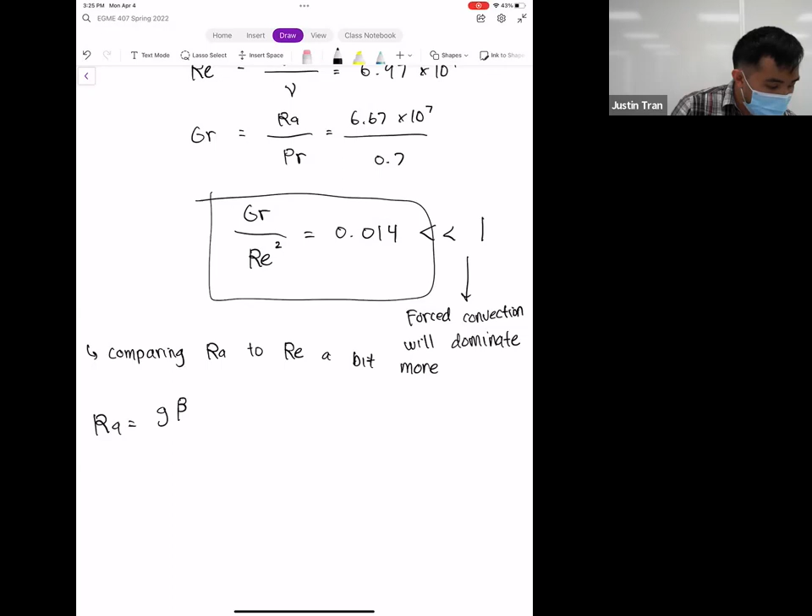Let me go ahead and write out the expression for the Rayleigh number. We have gravity multiplied by beta multiplied by Ts minus T infinity. So that's our Rayleigh number.

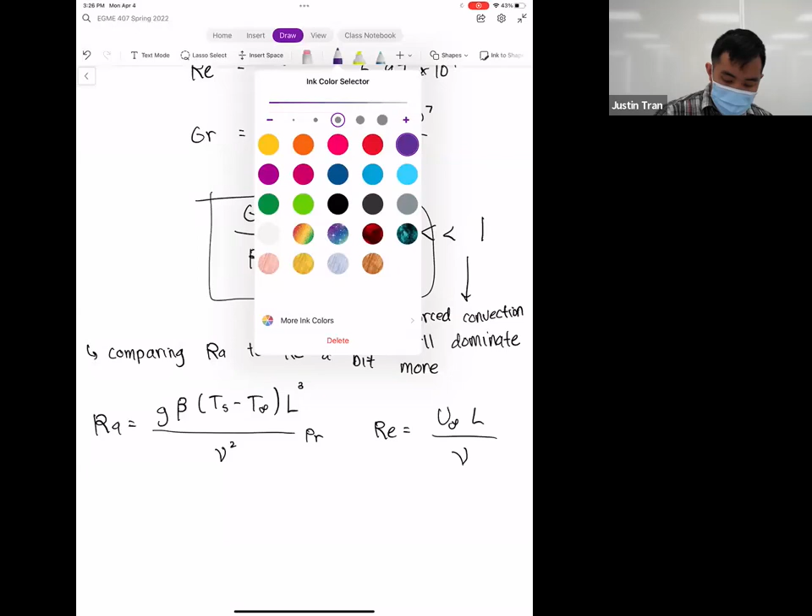And our Reynolds number is simply U infinity times L divided by the viscosity. In particular, I want to focus on the quantities in this expression that will enhance the convection. For forced convection, that's going to be U infinity.

If we increase U infinity, remember U infinity is the velocity of the flow. In other words, if we push the flow faster past our surface, this is going to enhance the convection.

It's the one and only flow quantity or flow parameter that we can change to enhance the convection. It's true that we can also increase the length, having a bigger device, but I'd consider that more of a geometrical property. If you're asking what properties of the flow itself we can modify to increase convection, I'd say the only option is increasing U infinity. Viscosity is there as well, but a lot of times you don't have control over viscosity all that much. So U infinity is the one you probably have the most control over in any situation.

Its equivalent counterpart on the free convection side is the temperature difference.

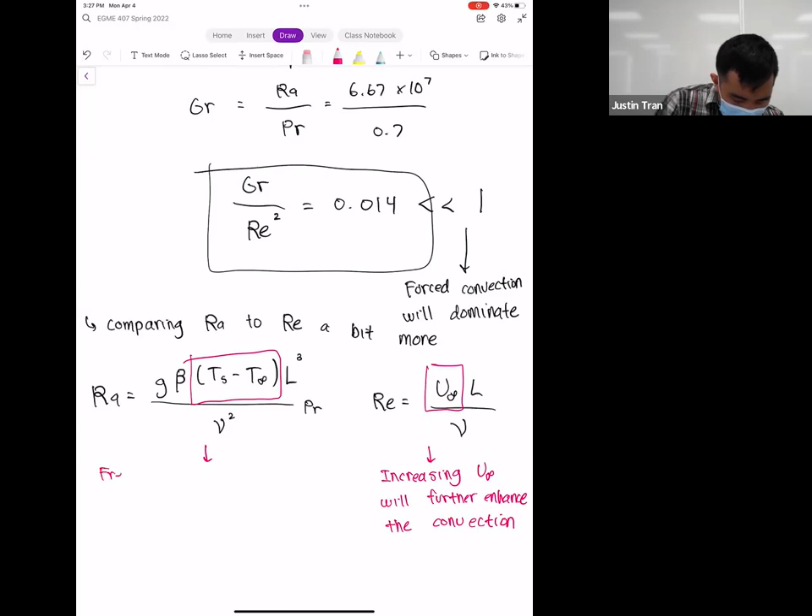And so what we can say is that free convection... oh my God, what the hell? I have no idea. No. My palm is sweaty today for some reason.

I need to share my screen again. I'm sorry about that. Sorry, everybody.

All I wrote here was just this part right here. If you look at the Rayleigh number and how it's similarly structured, the analogous quantity to the flow velocity, U infinity, is the temperature difference. So if you want to increase the amount of free convection that you get, the way you do that is by increasing the temperature difference.

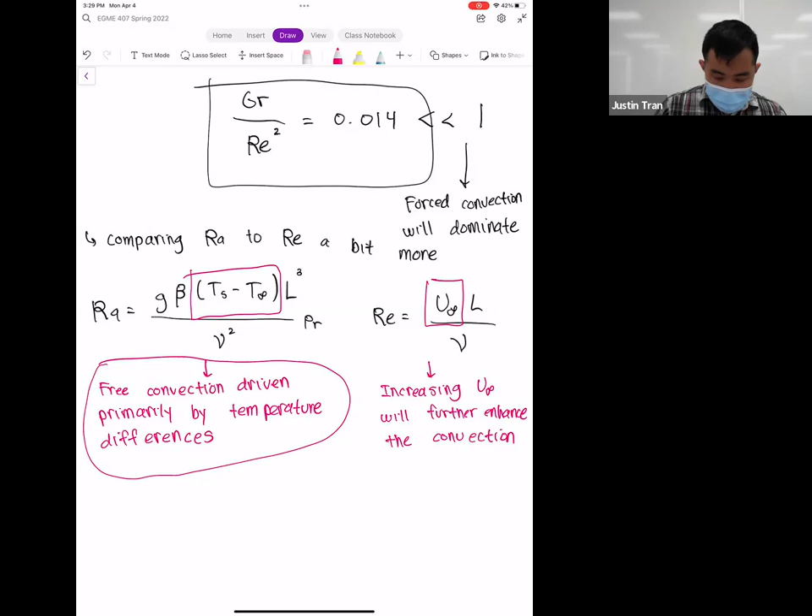That kind of makes sense, right? Higher velocity, higher forced convection; higher temperature differences, higher free convection, because that's going to make the density differences a lot greater. But let's talk about what this means for turbulence.

The Reynolds number and Rayleigh number both have the same property: if they exceed a certain threshold, you're going to get turbulent flow. For forced convection, the way that you obtain turbulence most of the time is by increasing the velocity. For free convection, the way you get turbulent flow primarily is by increasing the temperature difference.

The bigger your temperature differences in your free convection situation, the more likely you are to get turbulence. And if your temperature differences are relatively small, that means you're less likely to get turbulence.

I bring this up because at this point in the class we understand that the higher your temperature differences are, the more heat transfer that occurs. The bigger the temperature difference, the more energy driven along that temperature gradient. For free convection, it's kind of doubly effective—if you have higher temperature differences, it's going to drive more heat transfer just because you have a higher temperature difference.

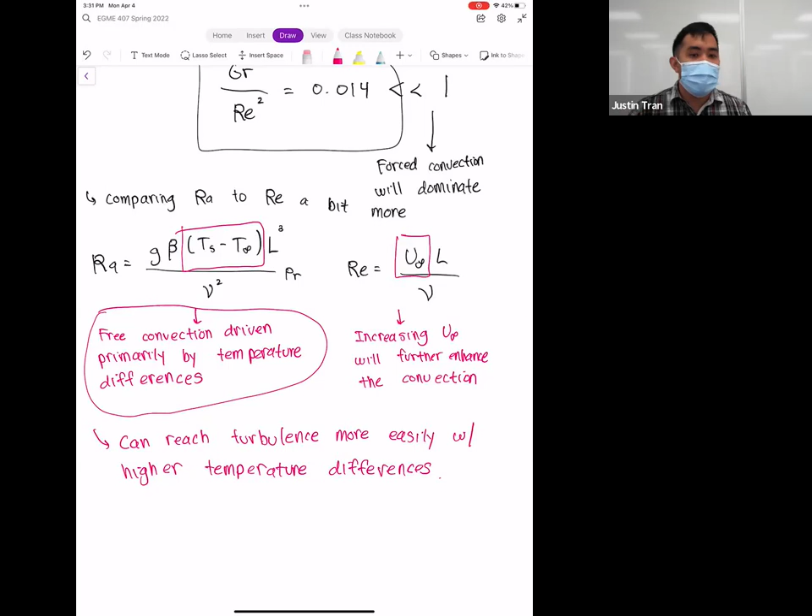But that effect compounds in free convection because it also increases the Rayleigh number as well.

Let's think of a normal conduction situation where you have a circuit. If you double the temperature difference—let's say normally you have a temperature difference of only 10 degrees Celsius, and you increase that to 20 degrees—you can expect the amount of heat transfer to approximately double. So you double the temperature difference, you double the heat transfer.

In free convection, that effect will be enhanced even more. So if you double the temperature difference, you might get 3 or 4 times as much heat transfer, because it affects the Rayleigh number and it affects whether you're going to be laminar or turbulent. It's kind of a compounding effect.

That's significant because most of the time when free convection is relevant are those times when you have huge temperature differences. This next example will illustrate that for you. Any questions on this?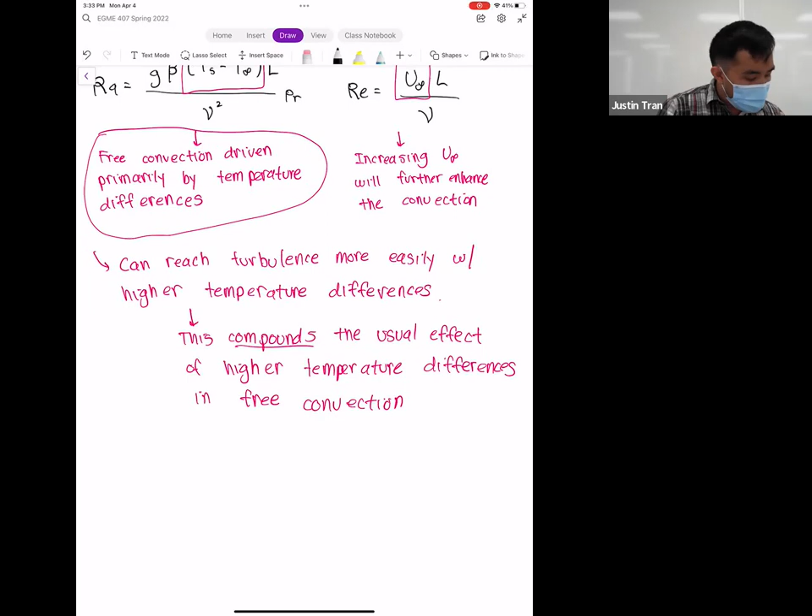Okay, let's do one more example and then we'll close it up for today. So let's consider a fireplace. Most fireplaces in homes are protected by some kind of glass door.

That occurs for a number of safety reasons. So let's say that we have a fire here. Let me add some orange here, give it some flare. And then in front of this fire, we have our protective glass door.

So this is our glass door. Let's say that the surface temperature—this fire is so hot that the surface temperature for this is 232 degrees Celsius. We also know its geometrical properties: the length vertically in this direction is 0.71 meters, and the width of this door, going into the page, is about 1.02.

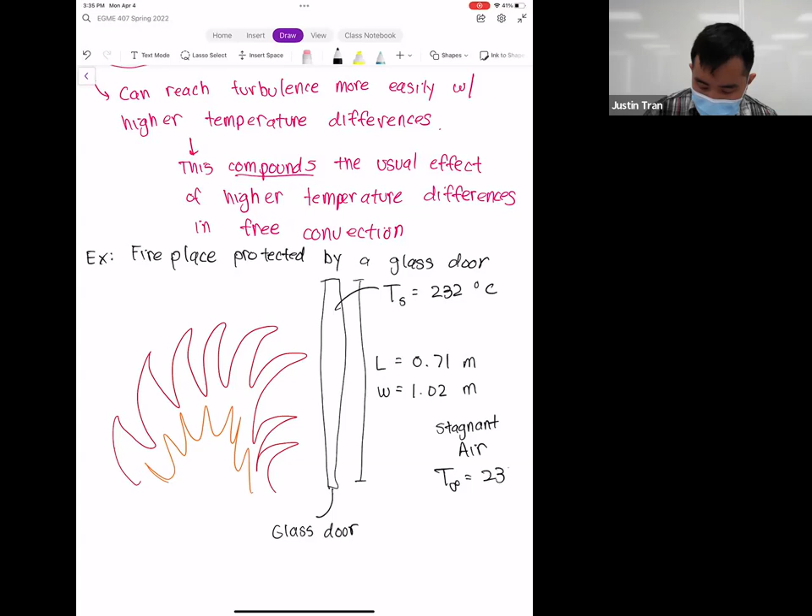On one side of this glass door you have fire, and on the other side you have just normal living room air, and that air is going to be stagnant. So we're not going to have any forced convection at all. Let's say the stagnant air has a temperature of 23 degrees Celsius.

From this situation, what we're interested in is computing the rate of heat that's entering the room from the fire.

So here we have another situation with free convection, where we have a surface that's much, much hotter than the air. That's going to create some density differences, and so you're going to have some free convection. We're going to follow our same convection problem solving methodology, and use that to solve for the heat transfer.

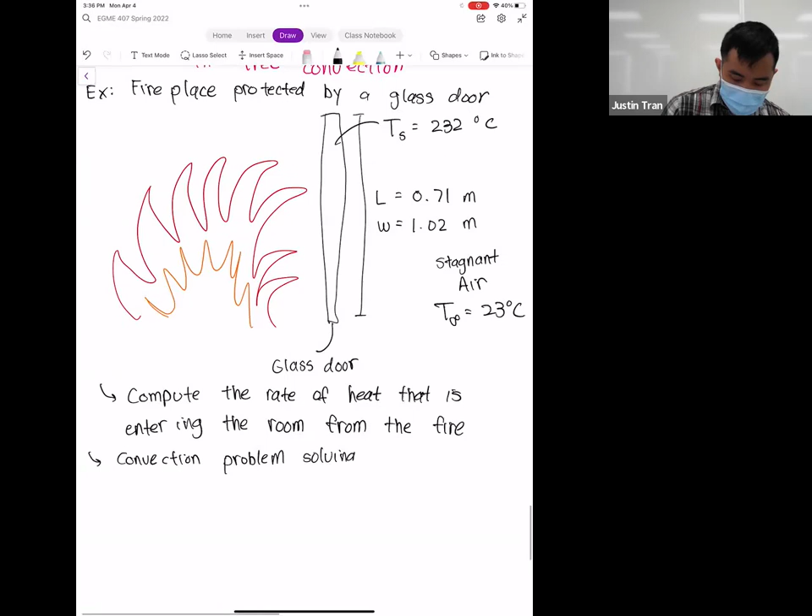Any questions on the problem setup? Okay, let's do our usual convection problem solving method. So step one is identify the situation.

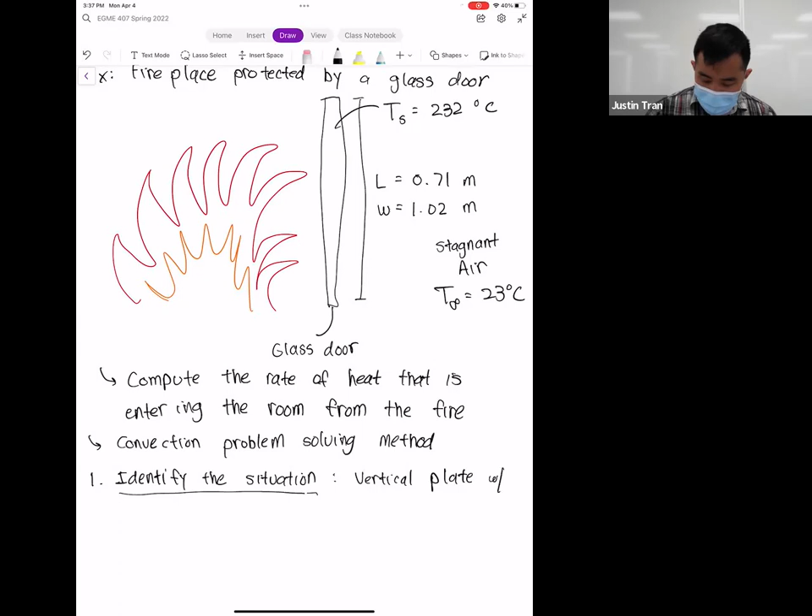The focus of our analysis is going to be the glass door, which you can see is a vertical plate—so that's our geometry. And the type of convection we're going to see is free convection, because we don't have any forced flow.

So that's step one. Step two is our reference temperature along with our properties.

Our film temperature, just like before, is the average of our surface and ambient temperature. So we have 232 degrees C plus 23 degrees C divided by 2, which equals 127.5 degrees C. If we convert this to Kelvin, which we'll need for beta, this is 400.5 Kelvin.

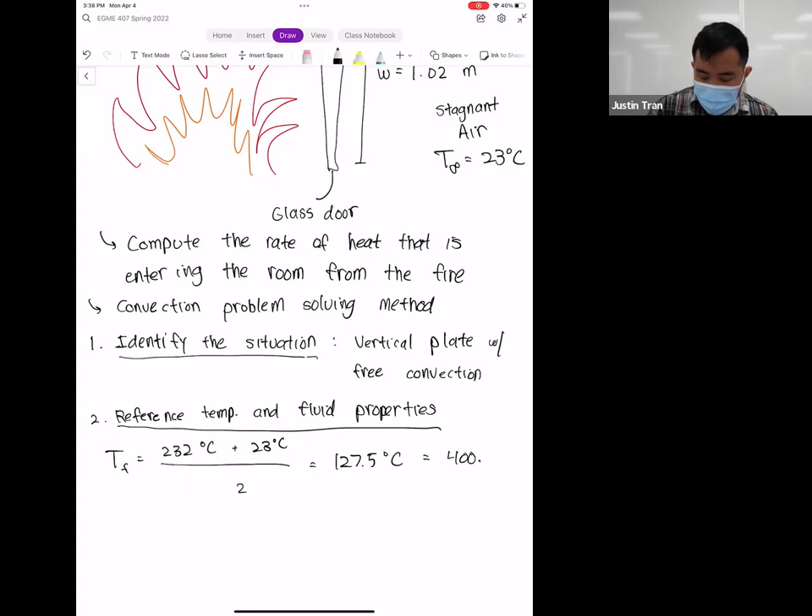Let's look at the properties of air at this temperature. Our viscosity is equal to 26.4 times 10 to the minus 6 meters squared per second. Our thermal conductivity, KF, is equal to 33.8 times 10 to the minus 3 watts per meter Kelvin.

We have our Prandtl number, which here is 0.69. And we have our beta. Our beta is 1 divided by the film temperature. Remember, for beta, we use the film temperature in Kelvin. So this is about 0.0025 Kelvin minus 1.

Now that we have all the fluid properties, we have everything we need to compute the Rayleigh number. Normally at this point we'd compute the Reynolds number, but since we're in free convection, we compute the Rayleigh number instead. Our Rayleigh number is G times beta times Ts minus T infinity times L cubed, divided by the viscosity squared multiplied by the Prandtl number.

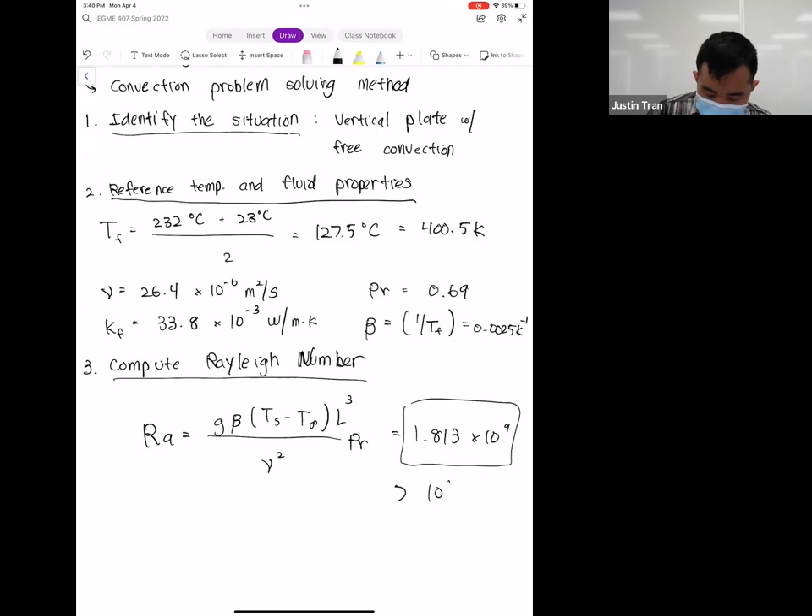We plug in all the numbers for this and we get 1.813 times 10 to the 9th. And since this is greater than 10 to the 9th, which is our threshold, this flow is turbulent.

And that makes sense, right? It makes sense that we have turbulent flow here because we have just a massive temperature difference. We have a temperature difference of 232 degrees Celsius and room temperature, so it makes sense that we have pretty turbulent flow here.

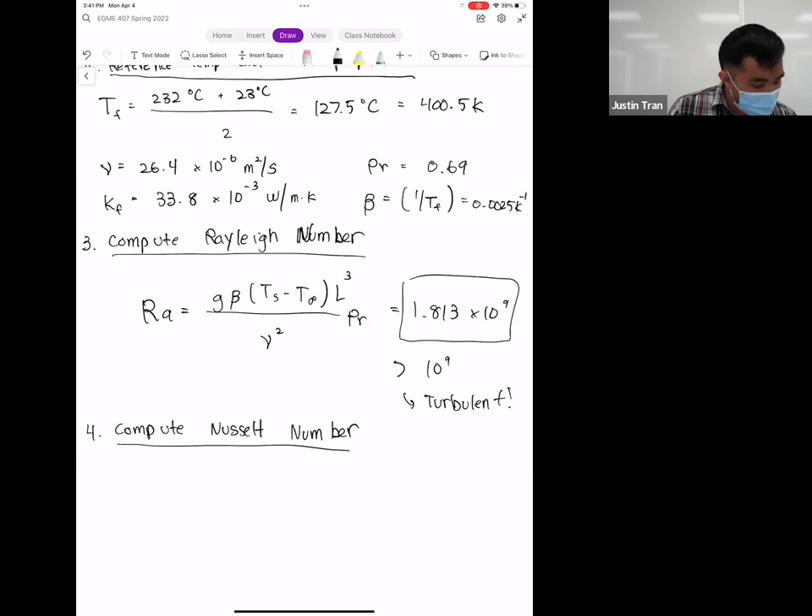Next we're going to compute the Nusselt number. The Nusselt number for turbulent free convection is 0.1 times the Rayleigh number raised to the 1/3 power. It's pretty straightforward. We plug in the numbers for that, and the result is 121.936.

Now that we have the Nusselt number, we can compute the convection coefficient. The convection coefficient H is equal to the Nusselt number multiplied by the thermal conductivity, divided by the length. Be careful here, since we have two lengths in the problem: the vertical length of the plate as well as the width into the page. Make sure you choose the length appropriately. Since we have a vertical plate, the L here is the vertical length of the plate.

We go ahead and plug in all the numbers for that, and what we get is a convection coefficient of about 5.8 watts per meter squared Kelvin.

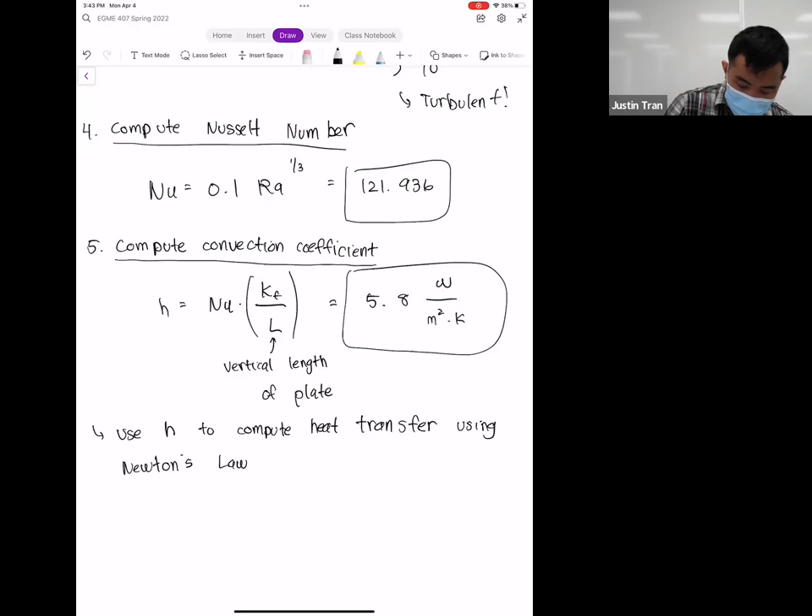That familiar formula is Q equals H times A times the temperature difference, Ts minus T infinity, where A is the surface area of the plate. The surface area is just the length times the width.

So you plug everything in and you get a heat transfer rate of 877.88 watts. That's the rate at which the fire is heating the room, outputting 877.88 joules of heat energy every second.